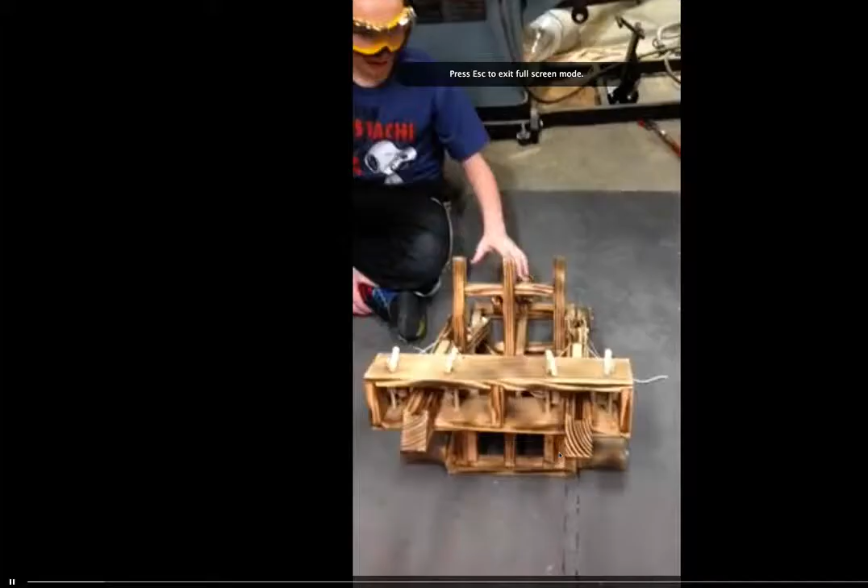Look what Ethan made. Hi, today I'll be showing you my catapult. It also has a cool feature with two ballistas. This is a catapult ballista. We will be firing at a horse. Now, you never know when a horse is going to come in your city and invade it, so you gotta fight back with one of these things.

Makes me think Trojan horse right here. So you fire, Ethan, this. Are you on here right now? Perfect. And then you pull these strings, and then it launches the ballistas, and then that horse is no longer to be seen. This is my catapult, and I hope you like it.

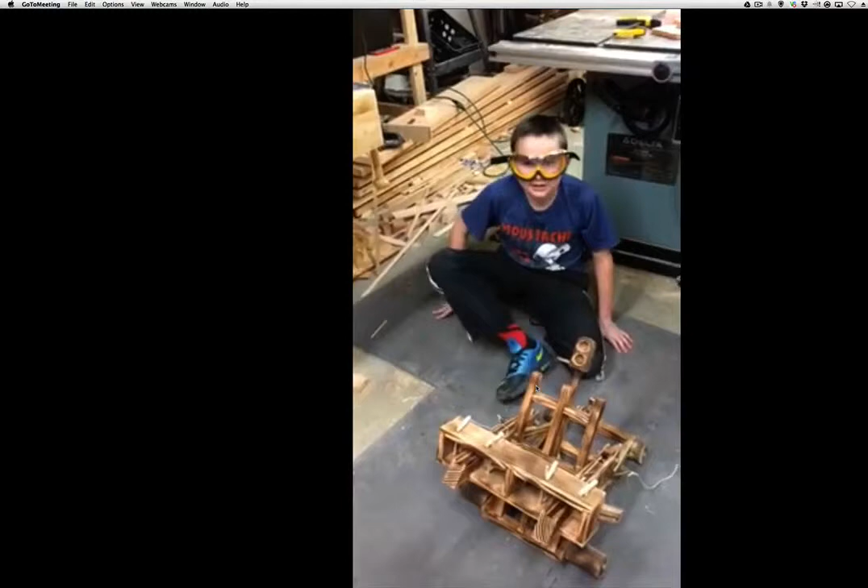All right. Well done. Ethan's not here for the lab, or he signed in. Hope he likes that.

All right, now, let me show you some more videos here. See if I can get some more videos. Oh, come on. Let's do it this way. Sarah made hers. Little hand.

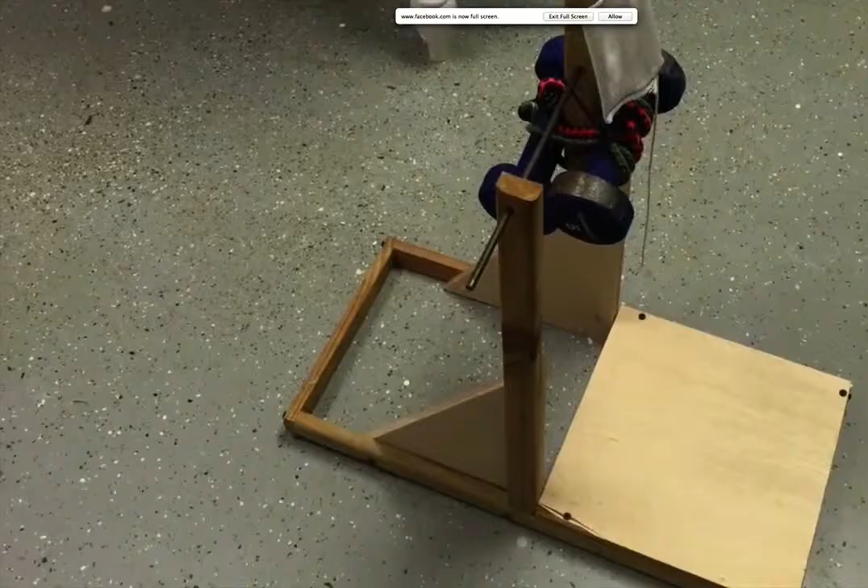Now, we've got that. And then check this. Oh, we got two more here. My name is Mateo, and I have built a miniature bow and arrow out of K'nex. I like the fact that Mateo here, as shown in the video, starts with Legos and rulers, and he keeps improving it.

Fire! My name is Mateo again, and this is concept 2. And since it's concept 2, I will be firing 2 bullets. Now, here goes. There's one. Follow the bullets now.

Hello, my name is Mateo yet again, and this is concept 3. Pretty interesting. Firing time. Very nicely. Remember, I'm doing this 3 times since it's concept 3. It takes a while to charge, but it's got a good range. Look at the dog just walking through, hey.

Pretty impressive. What's it made out of? It is made out of 2 pipes for the little groove, 2 large wooden rods, 5 little clothes hangers, and a good amount of popsicle sticks. And duct tape. Multicolored duct tape. Hey, you gotta love the duct tape.

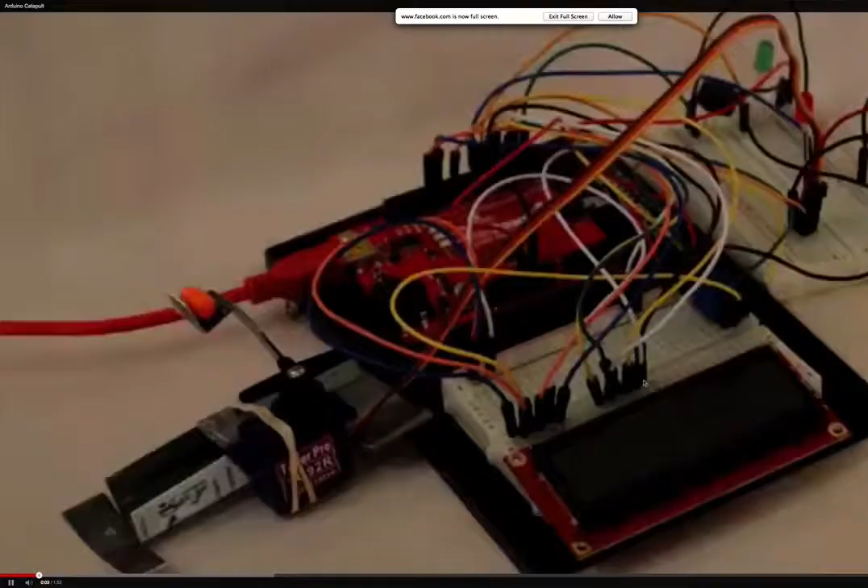All right. Last one I want to show you guys. Check this one out. He's using our Arduino. He's using our Arduino to tell it when to launch.

There's all the software. So it's got all his code showing up and the whole 9 yards. I thought those are all pretty sweet.

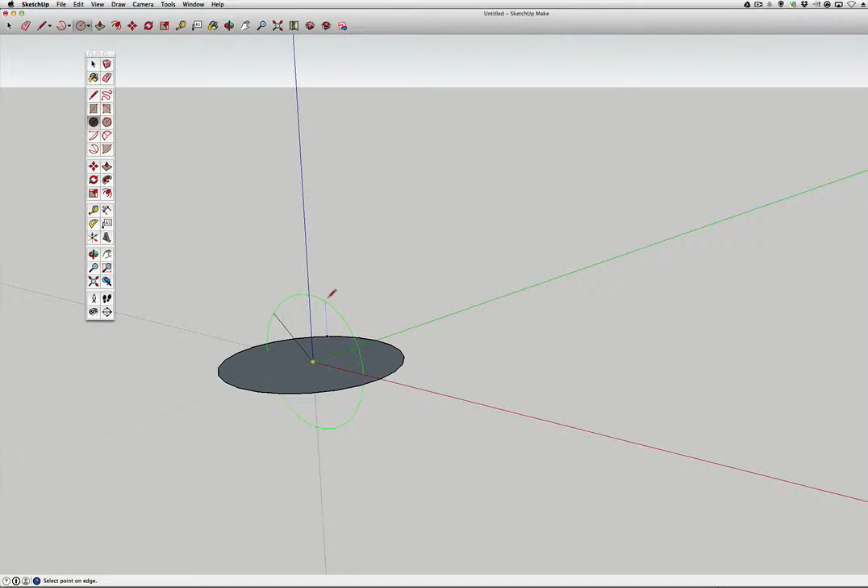And shift. Pull it in here. And I'll tell you what, just pull it out so it gets almost to the edge of the second one. So right now I'm on the edge of that. Then I'm going to use the follow me tool. All right, good. Click on that. And then I'm going to go down here. Let's try this again.

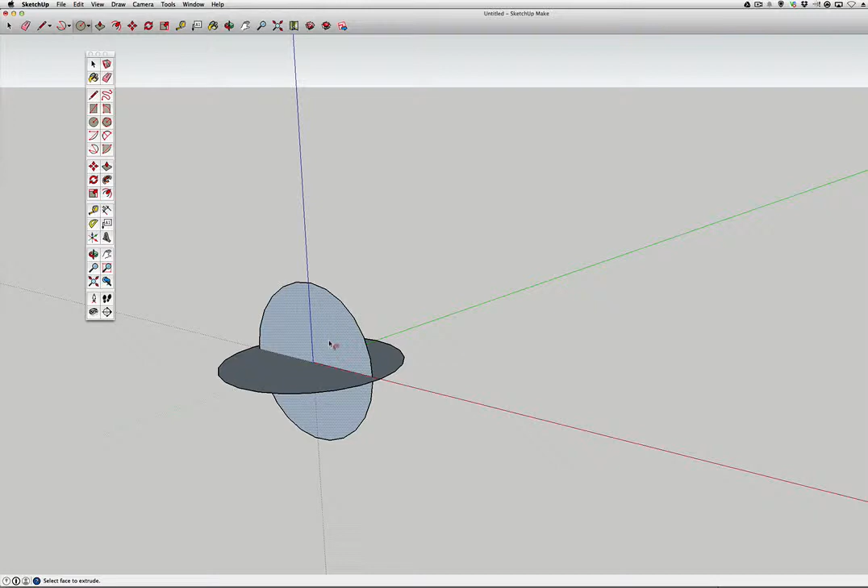And then click over and you'll get that black square. You use the command tool to hit it. Watch. Let me show you what we're going to do. Delete. And now I'll get rid of it. Get rid of this other line. So let's do that one again because that was kind of quick and you didn't see how we did it. But that gives you an idea. And then, they're cool looking. And this will give me a chance to show you this other one.

You can change your X and Y axis too on this. Click on this. Let's move the red so it's parallel to the other red. So we'll go there. Let's go on the green axis. All right, and it's already there. Okay. So you pull on the red, pull on the green, it puts you in a new axis. Again, we're going to take another circle.

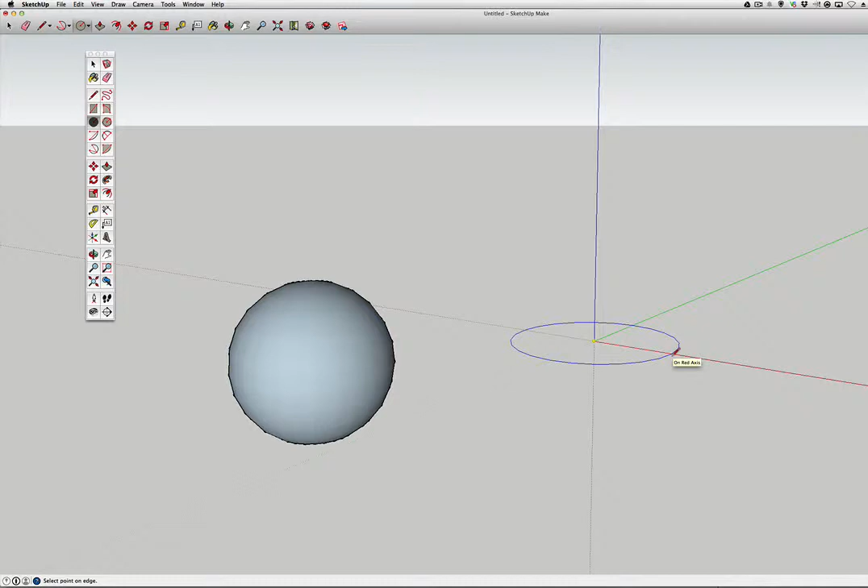Hit circle, pull this out. I'm going to say 1,000 again. 0, 0. I'm going to say 1,000 this time, maybe. This time, I'm going to hit shift. I'm going to go to either get it. That's a green one. There's a green one. As long as it's not the blue one, that's all that matters. Go back to the origin, pull it out.

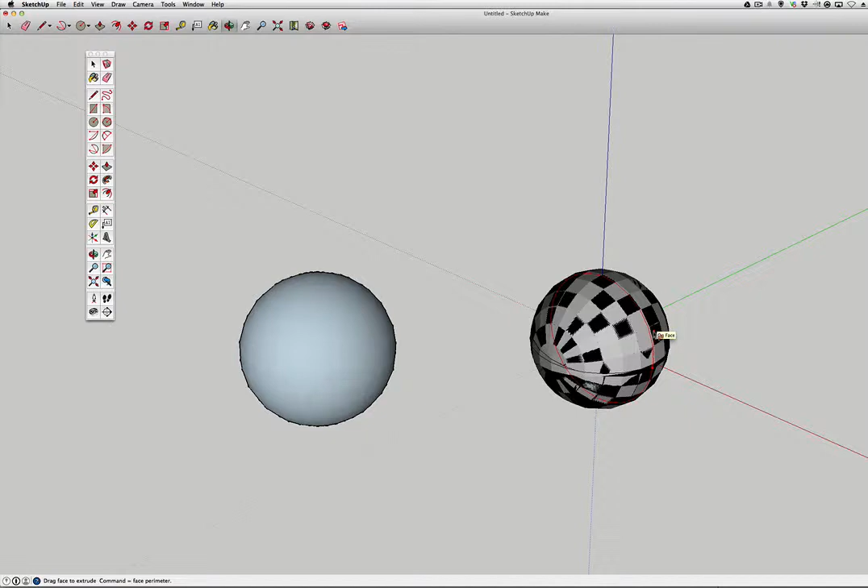I found it's better. Get as close as you can. Click. Let's make sure I didn't get too close on that. Wow, that's very close. All right, let's see what happens here. I'm going to hit follow me. There it goes. Hit the Alt key when you do it. Circle it back around. Now let's try it again.

So let's try it again. See how it gets all those checkerboards? That's what you're trying to get. And it works. Sometimes it works great, and something. There we go. I got it. It's frustrating, to be honest with you. So, even the SketchUp people say, hey, better just to download it. So the way it does spheres is not great. They need to improve that. Okay? There's a sphere. Okay?

Raise your hand when you at least attempted a couple times here. Let me know if you get one made. I think it tells you everything when SketchUp says it's better just to import one, and that's all you're doing with the warehouse.

If I go to 3D Warehouse right here, I'm showing you, get models. Watch this. Go to 3D Warehouse, search sphere. And there's all these different, a basic sphere. And you can download it or, yes, I'm going to say upload it. There it is. That's probably, honestly, the easiest way to do it. And then you could scale it, hopefully. And just use this diagonal and you can make it bigger or smaller.

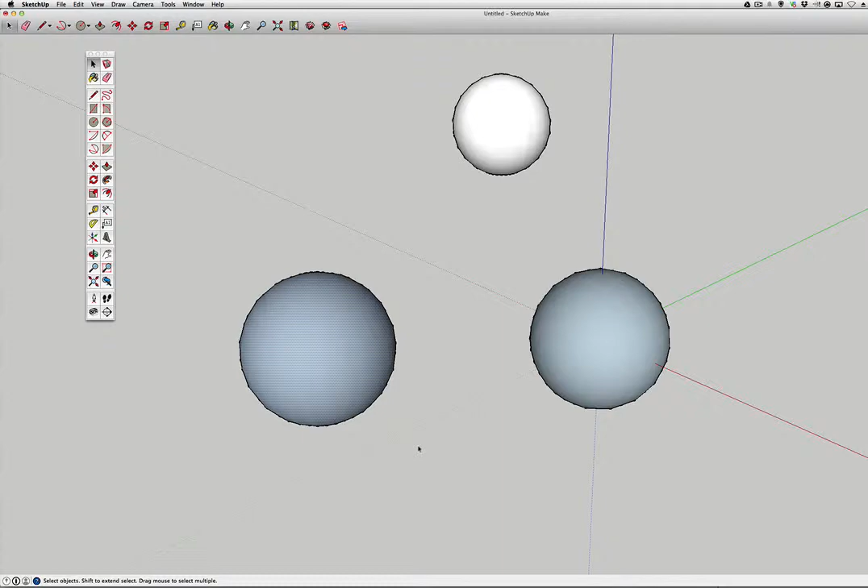All right. On these, you'd have to do the same thing. Highlight that whole thing, group it. We'll talk about this all in a minute, but make group. So that's now a group. So now when I do this, I can do something like this. When it goes, all right.

I couldn't see you do it because the webinar thing was in the way. Webinar, sorry. All right, let me show you. I'm going to show you the quick way, the way that they recommend, and I'm going to show you the other way to do this. I'm going to highlight this, make this a group. Since there's two circles to make this sphere, you got to make it a group or a component. We're going to say group.

Once I've made it a group, then I can go over here to the scale. That's this little, and then you go from the, see how I get a dotted line from this diagonal, that diagonal? Well, now I can pull it out, make it bigger, make it smaller. There I go.

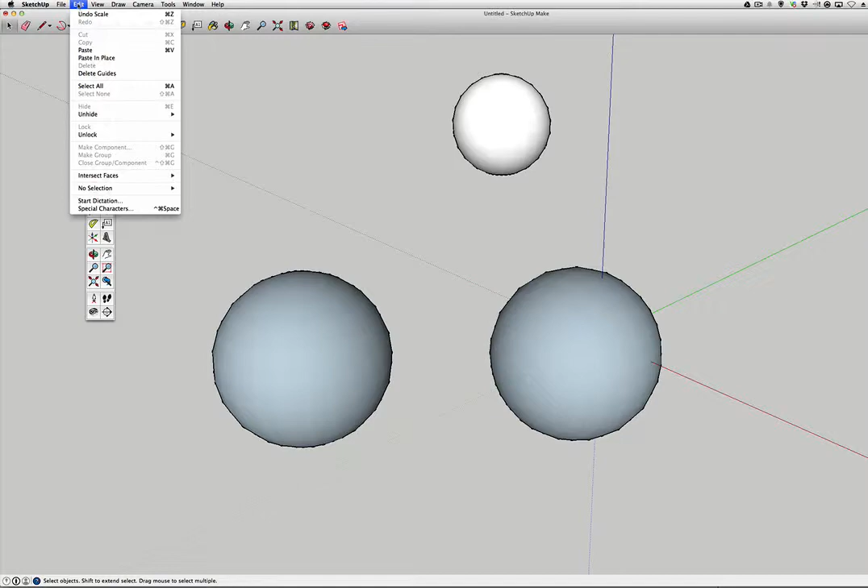All right. Now, you're saying, though, Mr. D, how do I do this? Well, let's go the first easiest way. Go to File, go to 3D Warehouse where you can find about anything, get models, type in sphere. And when I say you can just about get anything, I mean you really can get anything. All right, there's a sphere. Basic sphere. I'm going to take that one right there.

Download. It'll say, do I want to put it in my SketchUp model? I say yes. Loads it up. There it is. Move it around wherever I want it. And then I can do things like go over to here, again, this icon right there, set a diagonal across, and I can make it bigger or smaller. All right, that's one way of doing this. Let me hit the M key and move this one out of the way.

All right, say I want to draw a sphere by hand just because, hey, that's the kind of guy I am. I'm going to hit C for circle. I'm going to put it in here. I'm going to pull it out. This time I'm going to type 1,000. So there's my radius. Then I'm going to take my circle. I'm going to get it so it's not blue anymore. That's the key thing in this. It's got to change to a different color.

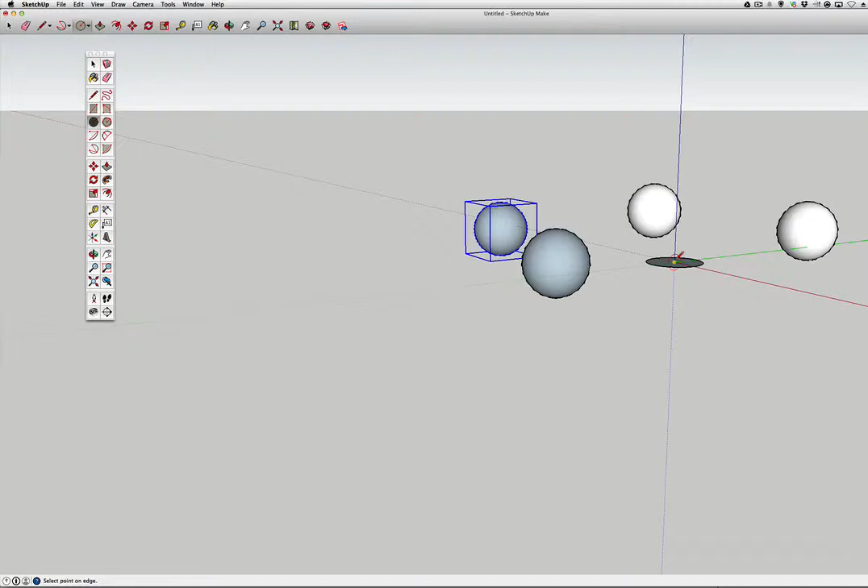And let me see if I can get this up here a little bit more. All right, so let's take it up here. Get the horizon up there. Yeah, see, now it's red. See how it's green here and then it's blue. We want it either red or green. It doesn't matter. Then hit shift so it stays that way. And then go back to the origin. Now I'm going to zoom back in here with my wheel. I'm going to pull this out.

All right, I'm going to back up a little bit. I'm going to use the Follow Me tool. I'm going to click on this, and then on this. Well, let me do this. Let me move myself around so I can follow this a little bit better. Let's try that again. Follow Me. Then I've clicked on the first face, and I'm going to click on the second one, and there it goes.

And it didn't even work. So let's try again. That's why I say importing it's better. I can't get this to work. See how it is right now? It changes that shape. And then it just went off. So let's try it again. Little one, big one. There it goes. I can follow the red line around, is another way to do this. And I just had it there. Let me try it again.

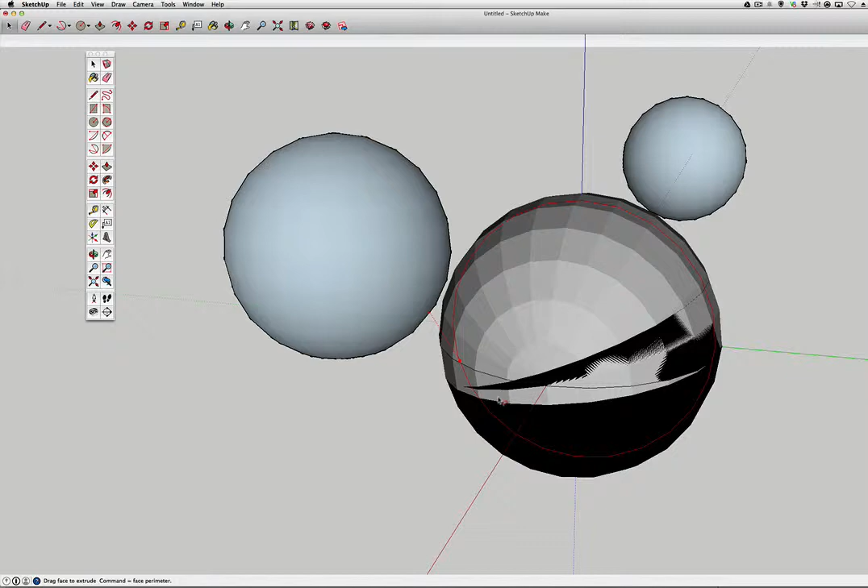It should go gray. So when it doesn't go gray, when you press enter or click on it, see, it's not doing it. It's not catching it for whatever reason. Try this again one more time. Click on it. Wrong key. One more time here. Let's try it again. Go up here. Let's try it one more time. First circle, command,

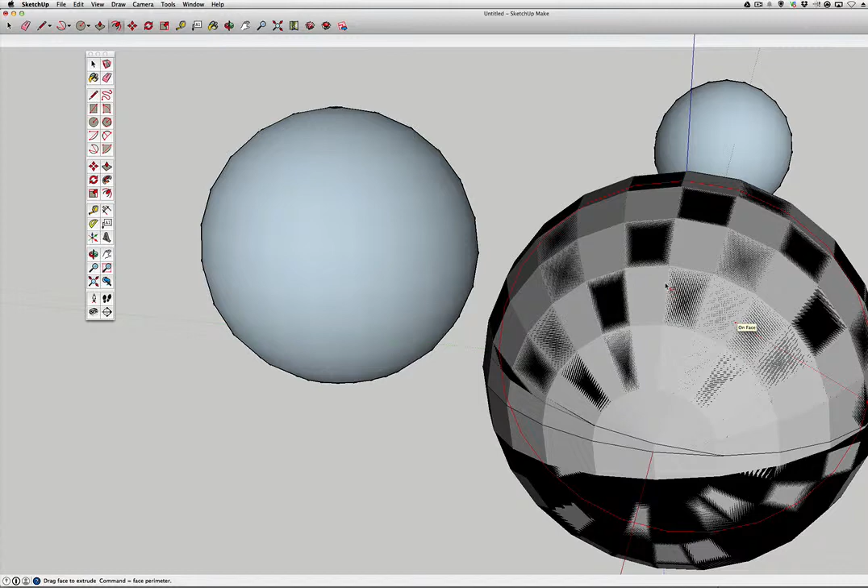and I'm not even sure why it's not catching no matter what I do for some reason now. Yeah, there's a line on the outside. It's not right anymore. I think if you don't get it the first time, it starts acting funky. So see, like now I got it. Now you tell me why it's doing that. See what I mean? I do that, and then go up.

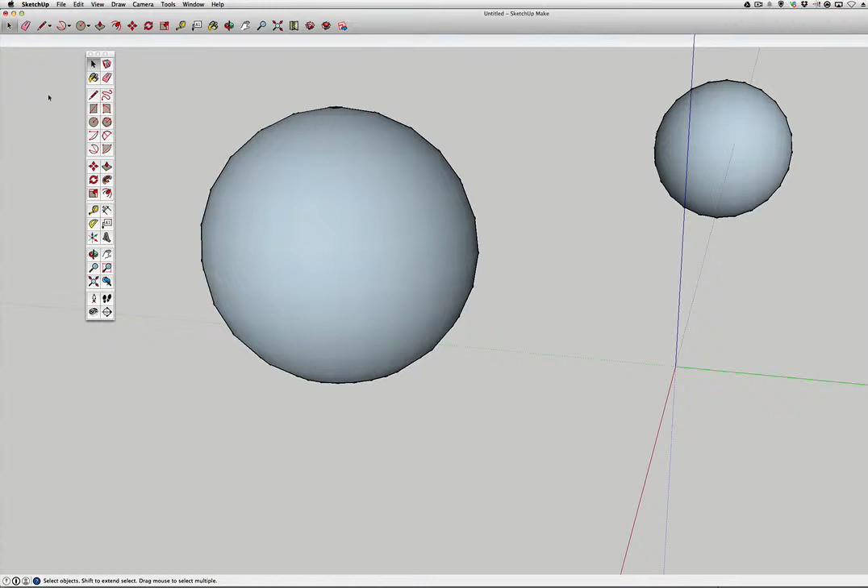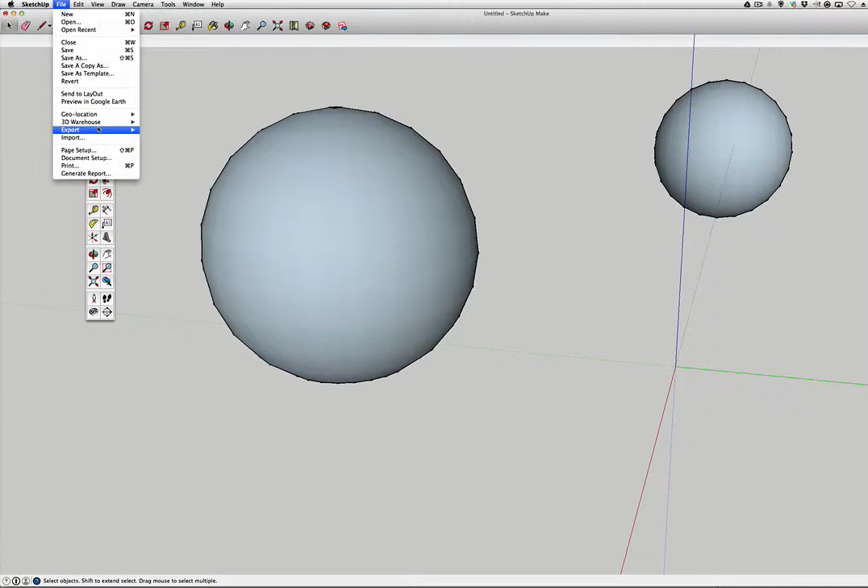So let me just show you the way I want you to do this. We're not going to bother with the steps anymore, guys. It does not work well this way. I've been playing with this. I had it working, made a bunch, and then it suddenly starts acting strange. So let's just do it the easiest way, the way they recommend. Go to File. Go to 3D Warehouse. Get Models. Type in Sphere. They have about anything in here.

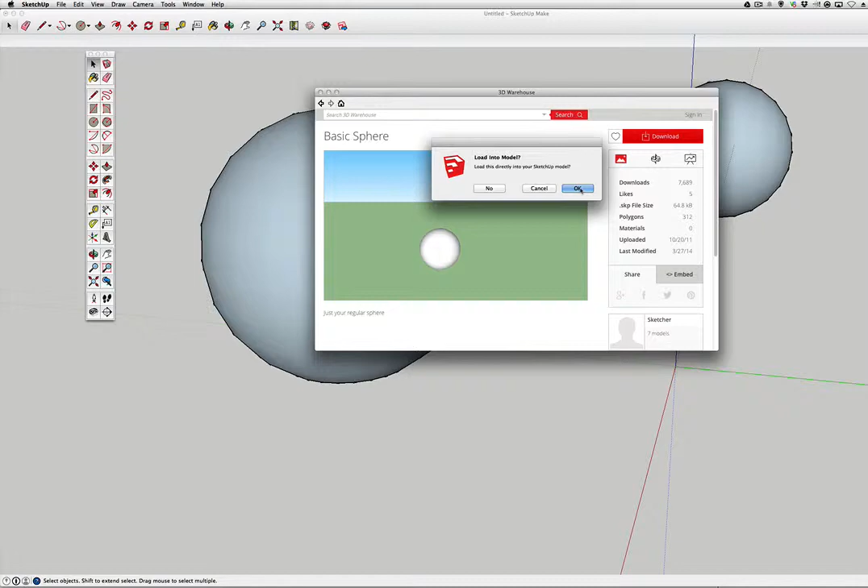Don't spend all day looking in here. You can see all the stuff they've got in here. Please look at that some other time. Select just that basic sphere. Then you say, that's what I want. Click on download. Directly into my thing. Boom, there it is. See, this square means it's grouped. Because it's grouped, I can go over to the scale button. See how it's green and diagonal across? You want to make sure there's that inference line going across.

Now, just click once, and you can make it smaller, bigger, whatever. That's what I would recommend you do.

Yay, you made it. Good job, Cooper.

All right, has everybody been able to at least make it from the warehouse? Raise your hand if you can. This we should all be able to do. The warehouse one should be pretty easy to do.

I only got about 8 of 13, so I can't figure out if you can't hear me or you're having problems. So, all right, 9 of 13. Have you gotten it? Hope, have you been able to figure it out there? Cooper's gotten it. Hope, yeah, all right, good. Jaden, all right, great. So you just import it, play with it. Let's go to another one.

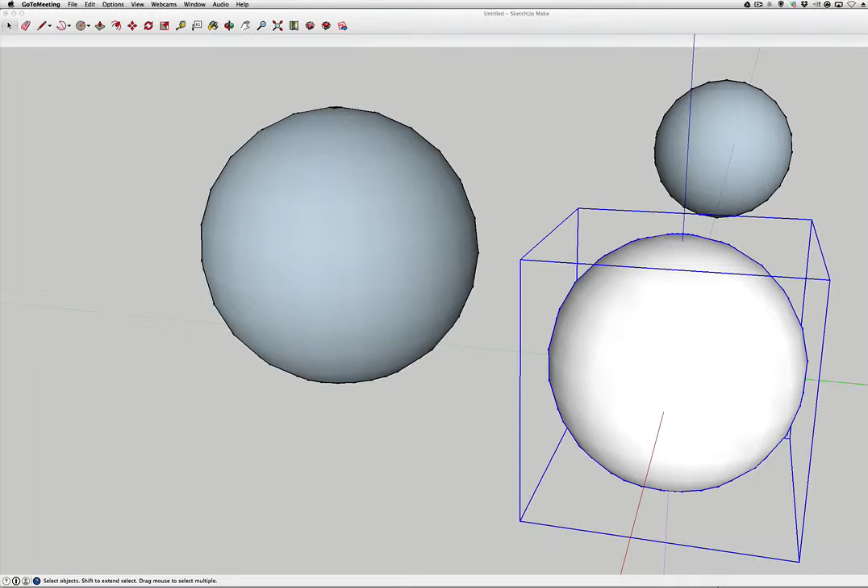Mine's not loading. Hope, I'm not sure what's not loading, Hope. Hey, Hope, what's wrong? What do you say, mine's not loading? Hey, Hope. Just go over right to here. Hope, go to File. Now, you got to be on the internet with it. So your internet might be slowing you down too much. Okay? Maybe having this webinar is slowing you down, okay?

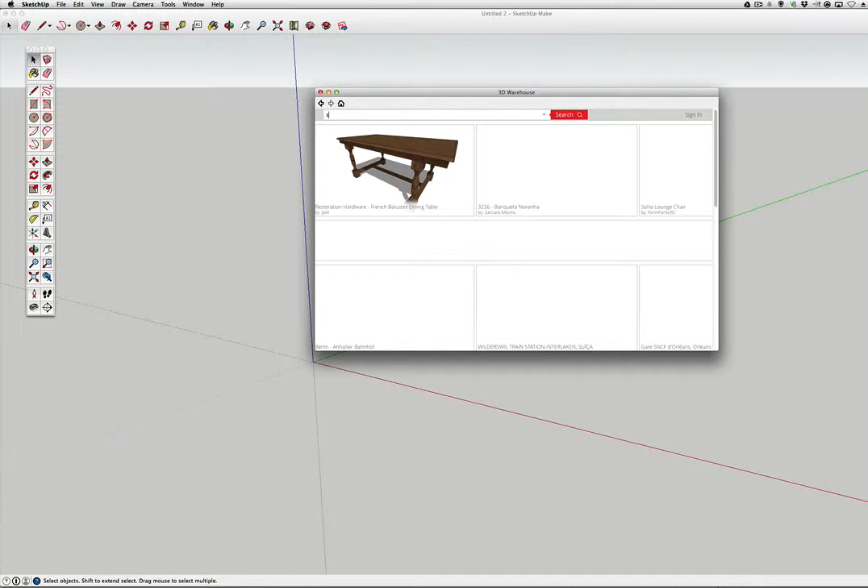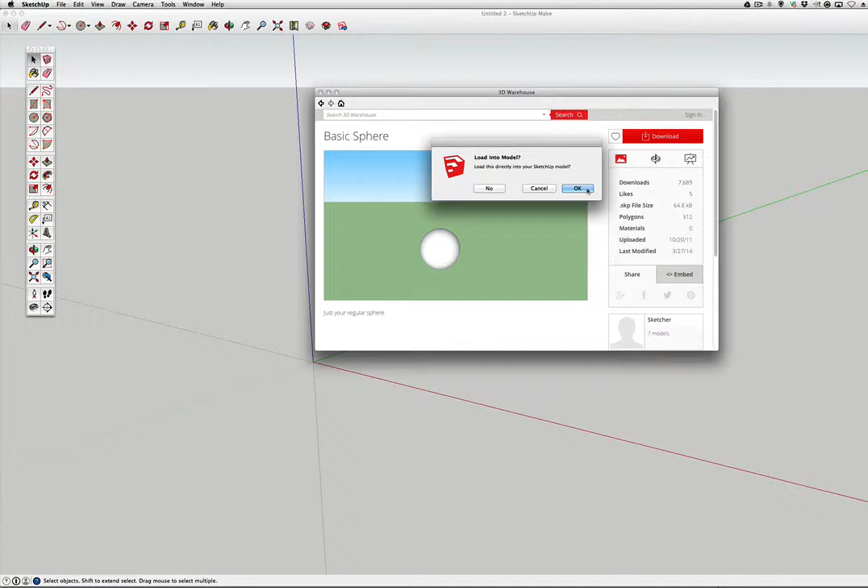So I'll just show you one more time for Hope, and then we're going to go on. So here I am in SketchUp. I'm going to go File, 3D Warehouse, Get Model. I'm going to look for it. Sphere. Whoa, yeah. That's Sphere E, which is nothing. It's circling and looking. There it is. I click on that, and then I hit download. And you say right in your SketchUp model, you say OK. And there it is. Right there.

Okay? Some people are making half spheres. Some are doing all kinds of crazy things. How do you drag something? You hit M for move. Make sure you've selected it, clicked on it 3 times. In this case, it's a whole group, so I can do that. And just pull it right down there. Stay along the green line, whatever axis you're on. Like here, it's going to be the red line. Stay on those lines or you're going to have problems. Okay?

All right. You all good there? Okay, can we go on to the next part here? Let me get out of this. If I select this whole thing, drag my mouse around, select it, hit delete, it'll go away too. Okay, let's take a rectangle. We're going to draw it out here. Then we're going to hit P for push. Pull it up. All right.

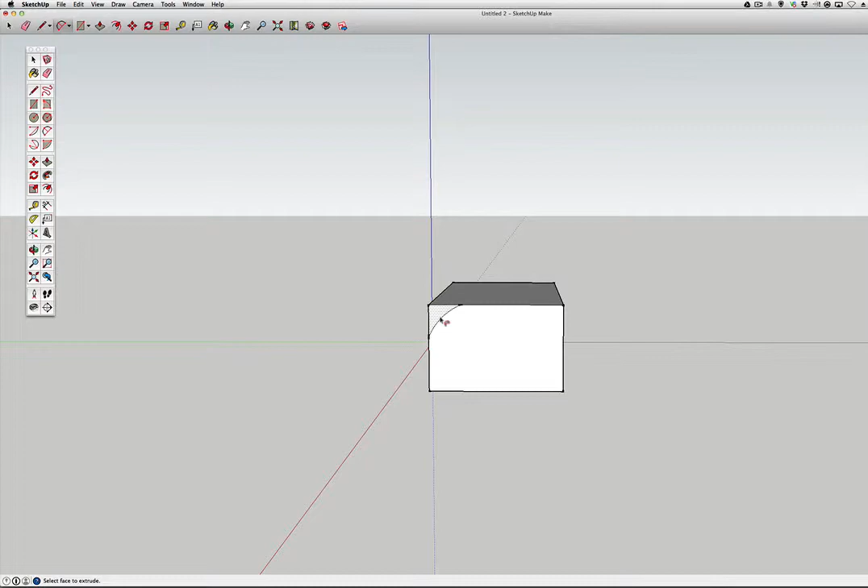Let's say we wanted to soften those edges. This gets to our next thing I want to show you. And this is when we do the arc. We're going to click one edge here, red on the edge, and red on that edge. Make sure it's on the edge. And then we can move this either way. We're going to move it forward there. Then we're going to do something called Follow Me again. We're going to hit the command key, click once there, and on the top, and boom, it does it. It may be alt on a PC. Let me show you how I did that, because that's actually a pretty cool thing.

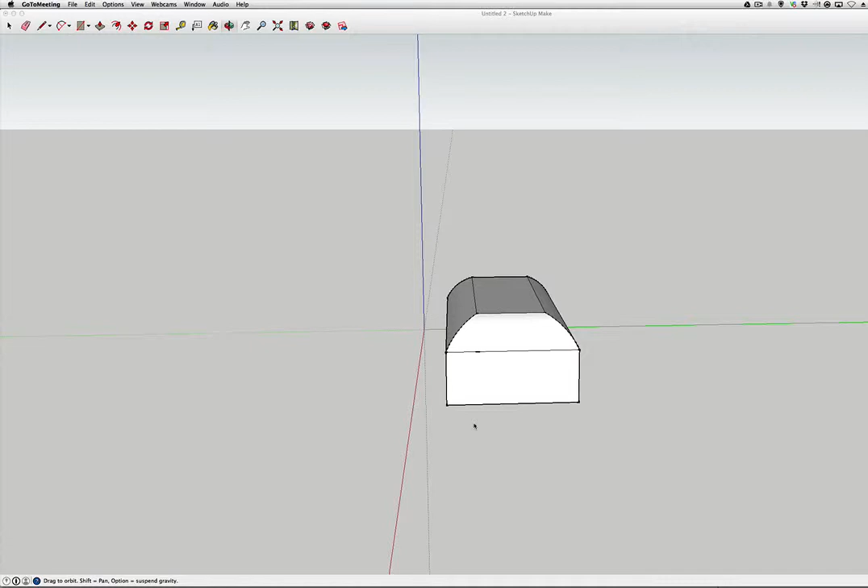I'll get Hope muted there. Everybody take a look again. I'm going to take a rectangle. Hit R for rectangle. Draw it out. I'll wait till I get a square here. I'll pull it up. All right. Now, say I want to do something neat on here. Let's do a 2-point arc. So I'm going to be red on the edge. It's important I'm on the edge. On the other edge, and I'm going to pull this way just a little bit. Right there it is.

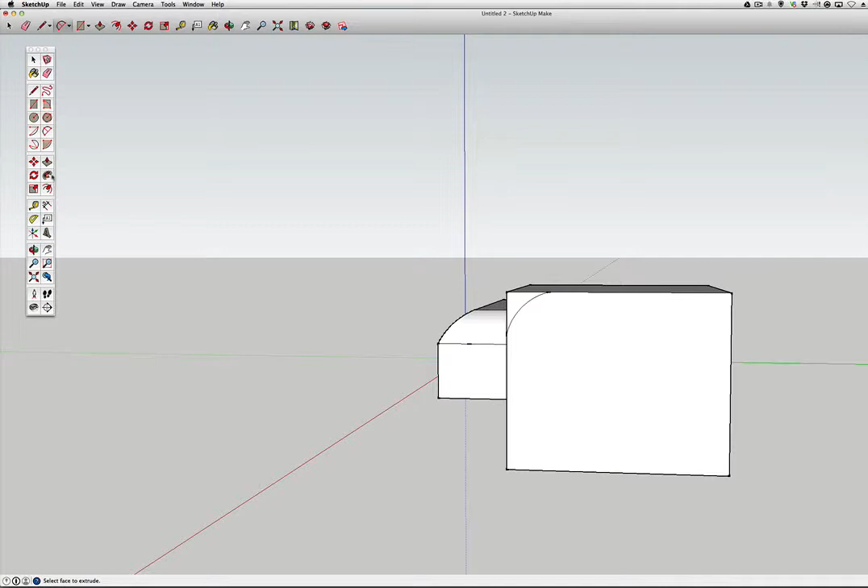Then, on the Mac, it's the command key, and I'm going to click on that Follow Me. On Windows, I believe it's the alt key. Click on that, and then click, oh shoot, let me go back up here. I need to do this like this. All right, here we go, hold the command key. Oops. Try this again. There you go. Click once, and you see how that shape's going all the way around it. Go ahead and try that.

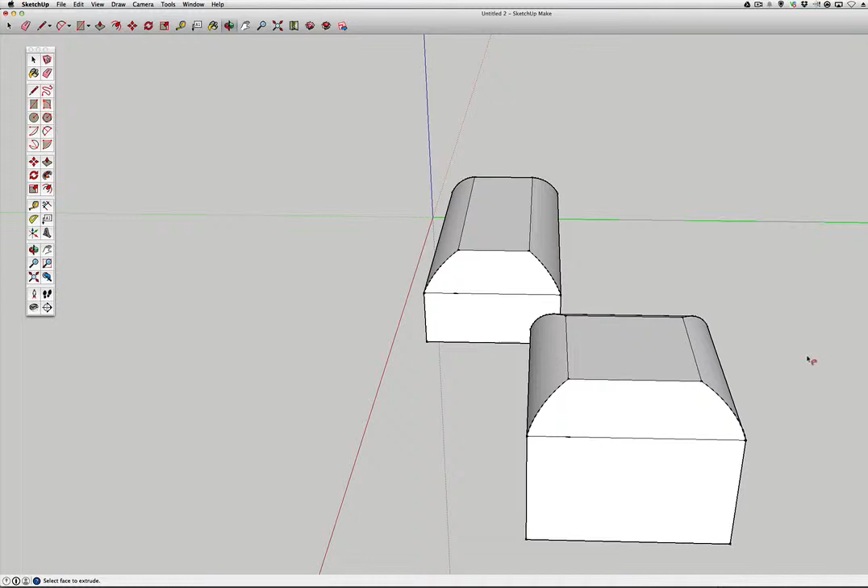Let's just take our time. I know it's a lot here, so we're not in any rush. I'd rather we get this down because this is a cool feature. Again, I'm going to hit R for rectangle. I'm going to hit P for pulling it up, right? Remember we learned P for pull up. Okay. Then I'm going to pick this arc tangent. I'm going to get it on the edge where it says red. We're going to give it a little bit different look. Then I'm going to hit the Follow Me.

And then click on top. And there it is. If you look at me, it gives a nice, and you can do all kinds of funky things with this. We've just started. Raise your hand once you've done that, okay? Well, while you're doing that, I'm going to work on, create a poll here. All right, good. Well done, folks.

This software is one of the tools we can use for 3D printing. I think it's going to ultimately lend itself well to when you guys have a laser cutter down the road someday. Get your hands on a laser cutter.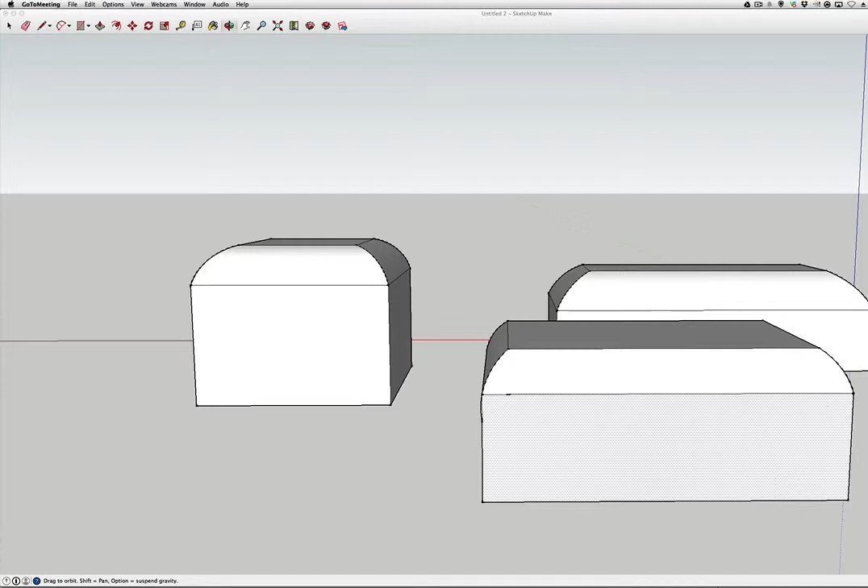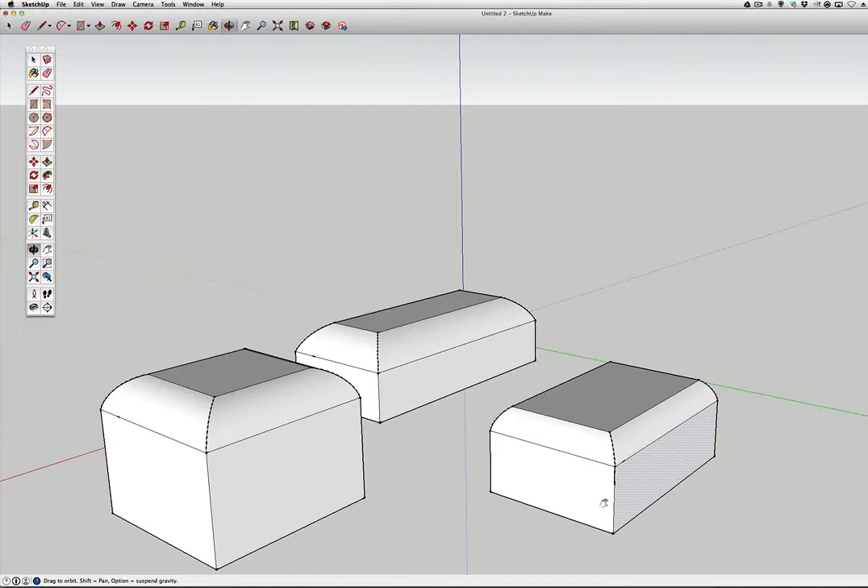Let me know. I can't do it. No worries. Let's try again. Okay, let's go over here. Again, if you're a Windows user, it might be a different key. And if you do a search on this, this is called the follow me. All right. Now, I'm going to hit shift to pan this over so we have some room.

I'm going to draw a rectangle. Or square, whatever. See that little inference line there? I'm making a square when I see that. I'm going to hit P for push. I'm going to pull it up. Then I'm going to hit O for orbit to swing myself around. It's important to get yourself where you can get to things. Shift my hand.

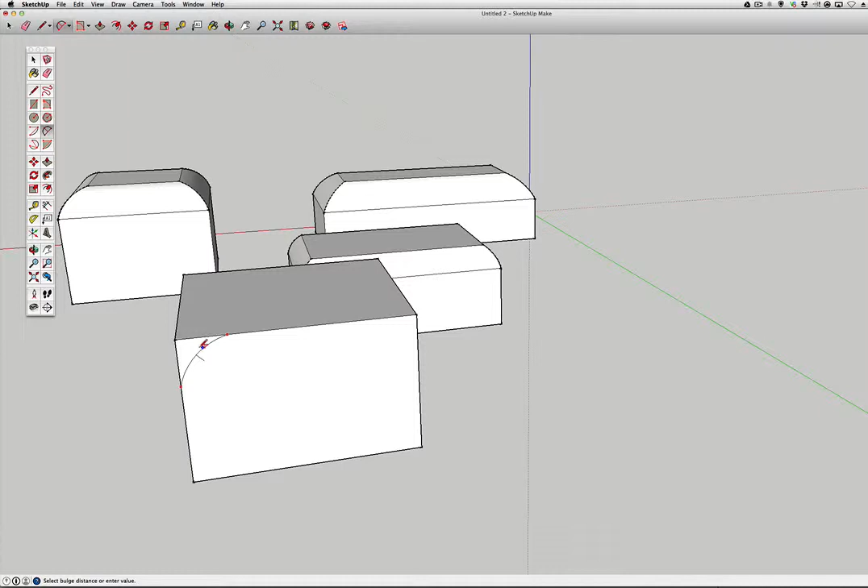All right, then I'm going to click here. Whoa, I went the wrong thing. We'll get to that down the road. We don't need to use that right off the bat. Let's use this. I'm going to go to the edge. I'm going to go to the other edge. In this case, we'll make it a little bit extreme here.

All right, now I'm going to hit follow me. This is what I'm using, a Mac. I hold the command key down. I click there, and then I click on the top. See how that looks? And I get that. Do you see that, folks?

Everybody put their hand down. Windows users, how many of you guys did this? And what key did you press? Did you press the Alt key on your Windows machine? Or was it the Control key? I figure it's one or the other. I think it's the Alt key on Windows. We can look it up in a minute here. Alt. All right, it was right. It is the Alt key.

Did you get it? Sounds like you did. All right, good. You got it. Excellent. All right. You don't have to use Alt. You can also follow it. You can do it where you trace it all the way around. I just find that's a shortcut. Okay? Someone's already pointing that out to me. They're very correct.

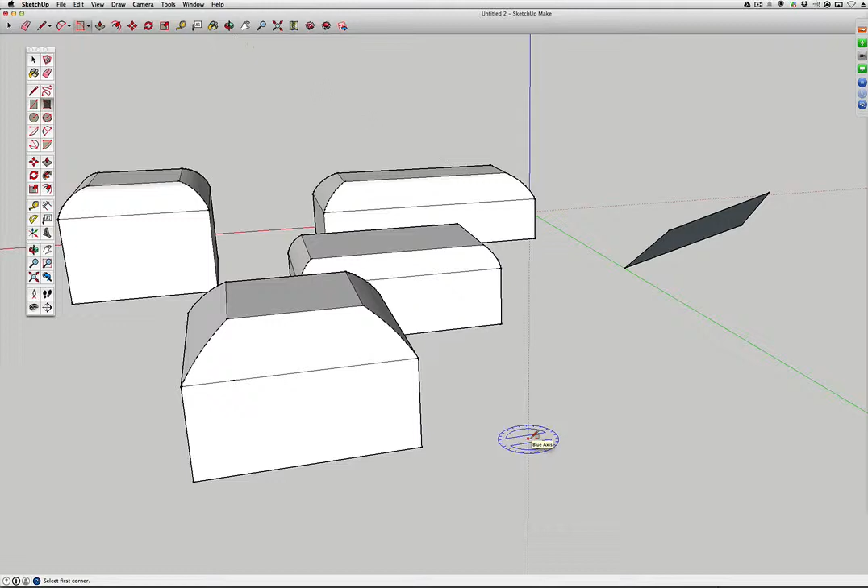I can take it at an angle here, click there, and then use this to pull up an angle off that. So I get this going for you. So it's kind of funky, even the people that make SketchUp say you have to play with this a little bit to get the most of it. So you can get all kinds of funky shapes that way. I don't think I'm using that one very much. I think you'd have to get pretty good at using that.

All right? Now, let's go ahead and do another one. Let's talk about punching holes through these things. And I'm going to show you the trick on this. Now, these need to be parallel for this to work well. So if you do it on these things here, you have to do it on the rectangular part. Don't do it up on the curve, because it can't do it for what I'm going to show you. So I'm going to start off with a very simple R for rectangle again.

I'm going to draw it in here. In fact, we got too much stuff here. Let's go new. Let's start right here. R for rectangle. We got a square. P for push. All right. Say our guy wants to be able to look through this building. Well, let's make him a little window. So we're going to put another R right up there.

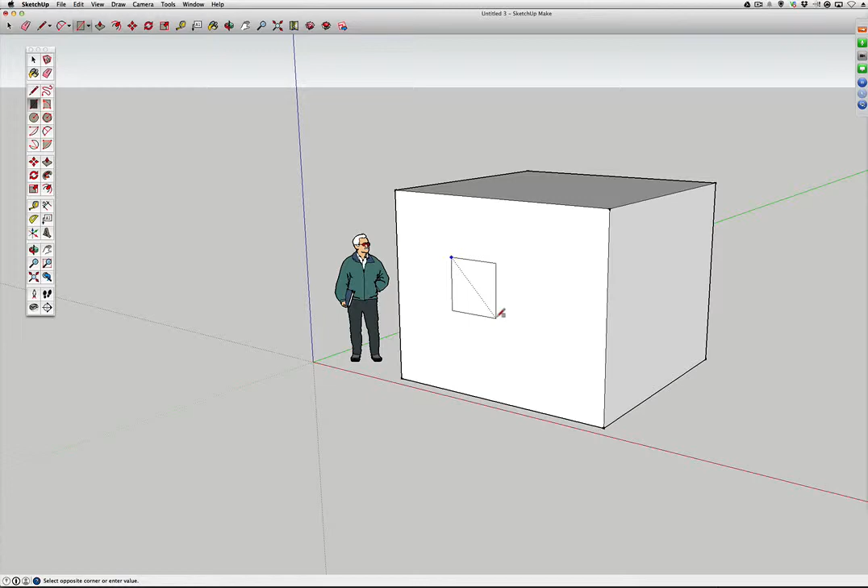Another square window. Now, before we push or pull, I'm going to circle around so I can see it. I'm going to hit P for push. Then I'm going to push it in there. And then suddenly, if I do it slowly, it'll say face. I'm too high up. All right, let's try this again.

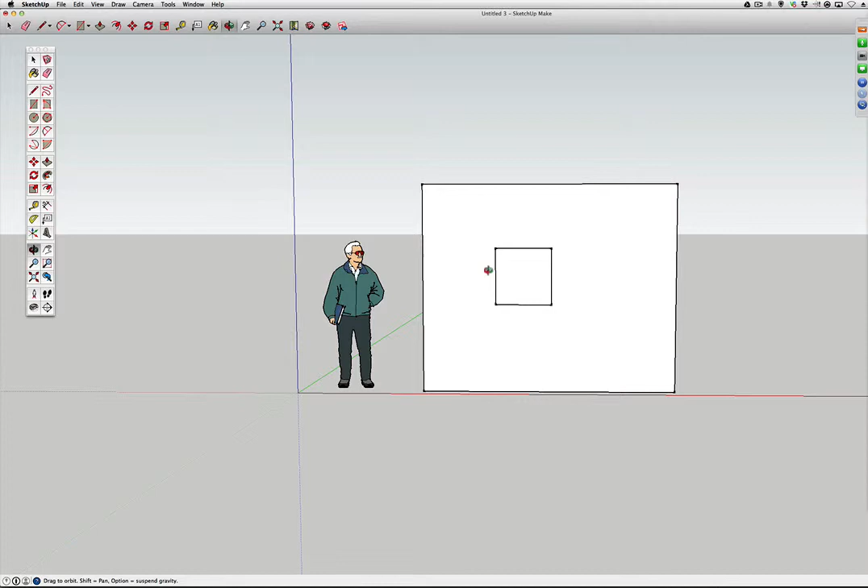See how it says on face? It kind of changes blue with the blue skyline. Now if I click on it now, guess what? I punched a hole through this building. Everybody do this. Again, you got to wait. Do it slowly so you can see face.

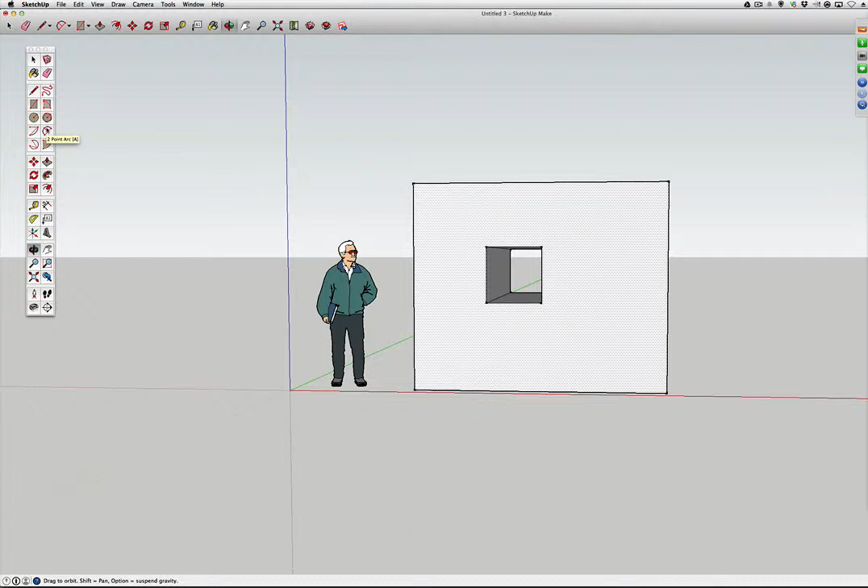And you can do funky things with this. Like on this, I'm going to do a 2-point arc. I can even do a 3-point arc here. Let's see how that would work. All right, here, here. I don't think that's going to work real well. Let me undo that. That did not work well. Not as intended.

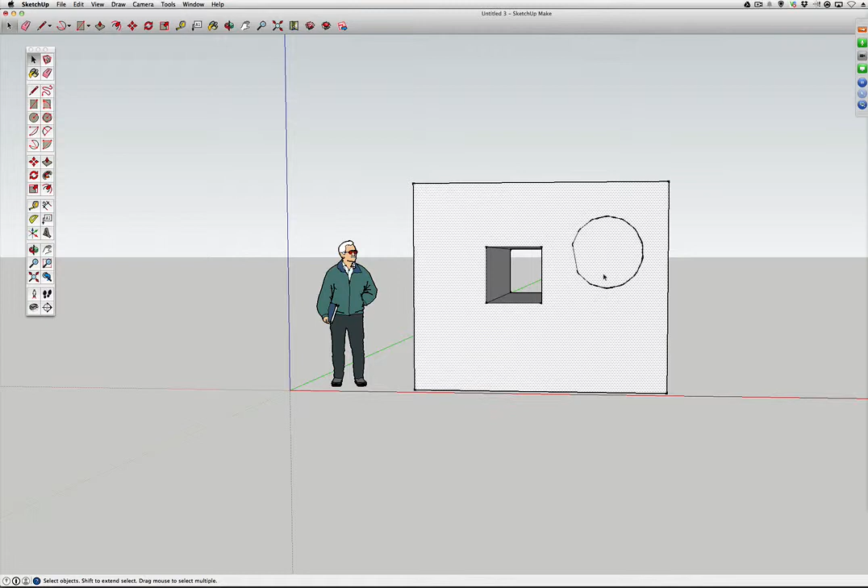So I'm going to Command C. Let's just do a 2-point arc. Watch. See, the 3-point arc, I don't really... So I'm going to put a little window here. This is going to be a little half. Right there. I'll change this to an L for a line. On this endpoint to this where it says endpoint. On face, on face, on face. Come on. There we go. Green for a little endpoint.

Now I want to hit the push and pull on this. I'm going to push on it. And I hit the wrong thing to push on. Let's try that. Now hit push. Why is it doing that? Now let me push it in. So I must have messed something up on that line. Yeah, it wasn't against there. There we go. Now I'm pushing it back in. There it is. See on face? Now click. There I go.

All right. How many people have gotten that to work? Raise your hands. All right, come on. Let's give everybody a few more moments here. All right, now let me just real quick select a poll here in a second, just because I want to get a sense of how we're doing. Go ahead and pause that.

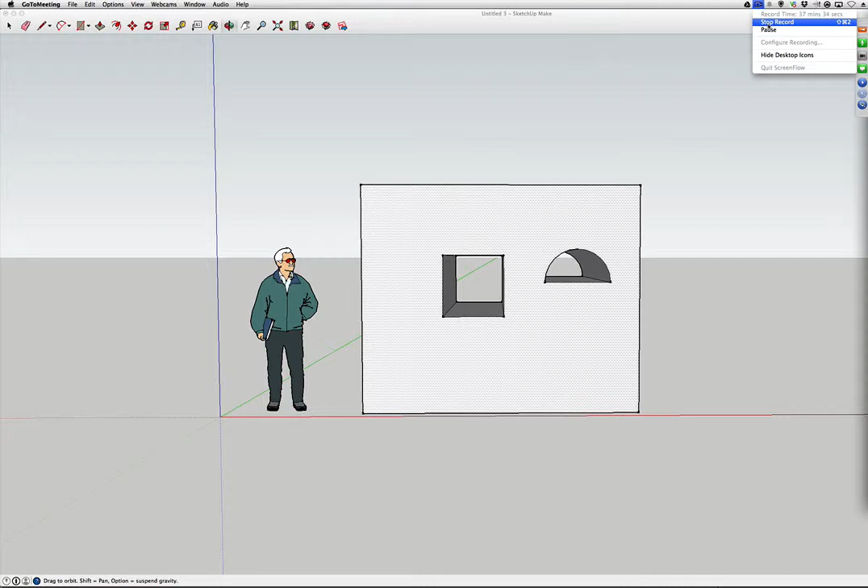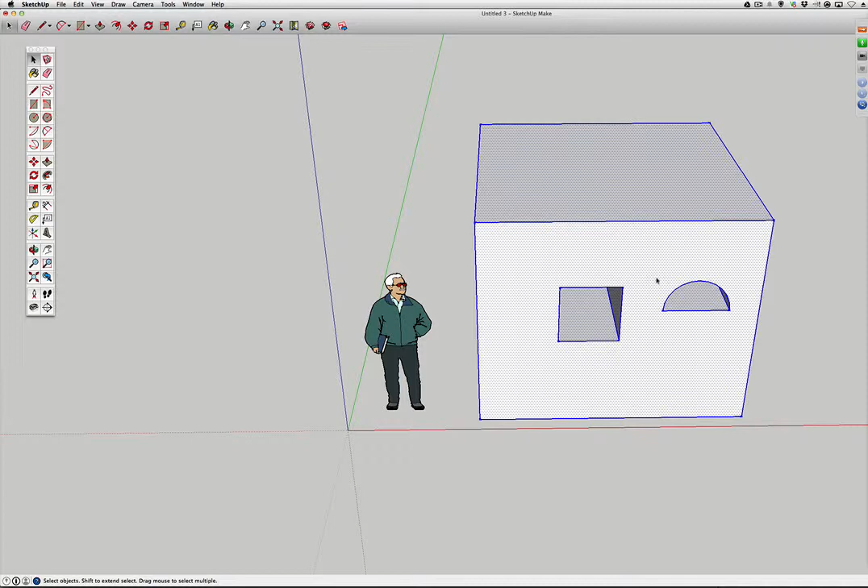Let's do something else now, if that's okay. And I've got the video. You can come back later. It'll be posted by this evening. All right. I'm selecting the whole thing. I could have done this. Remember, triple click on it, hit delete. Now, I'm going to show you how we might make a table.

Okay. We got a question here. Hang on. What do you click to make a hole after it's pushed? You don't have to click a hole. Watch what happens. I'll do that for you real quick then. All right, let's go ahead and do this. I don't want to do that. You can tell.

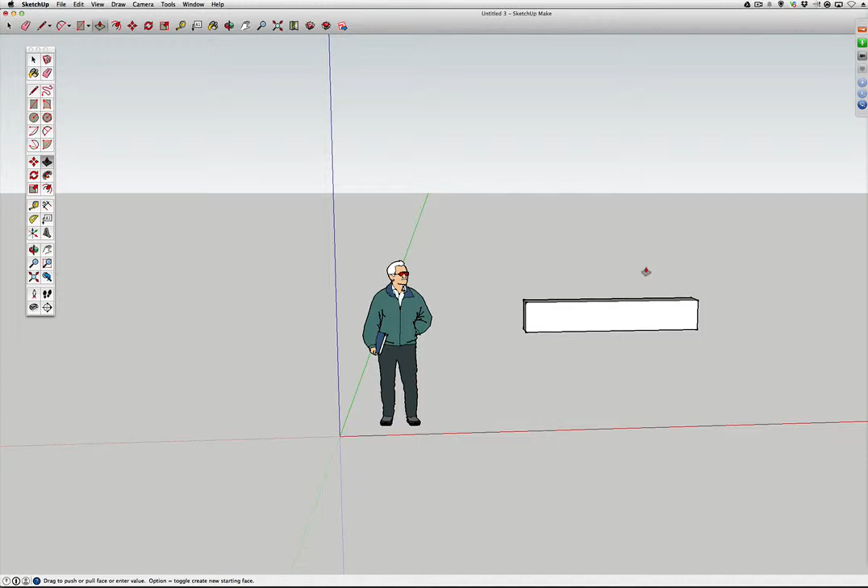Okay, when I go to put a hole through this, I'll make a big hole here. Watch what I'm doing now. All I do is I hit push. I push it till it says face. Now it's on face. Then I stop clicking. See that? So that gives me the hole.

Oh darn, do I still have to hide the results? There we go, sorry. All right. Okay. Let's try that again. Let me do that again.

Let's go edit and do push pull. All right, so there it is. I've got a square here. I'm going to do a push pull. Watch, when I push until I see it says on face. Now, see it says on face? Then quit pushing and it'll be good. Before you start pushing, make sure you're centered right through it so you can look through the holes. That's the best tip I can give you.

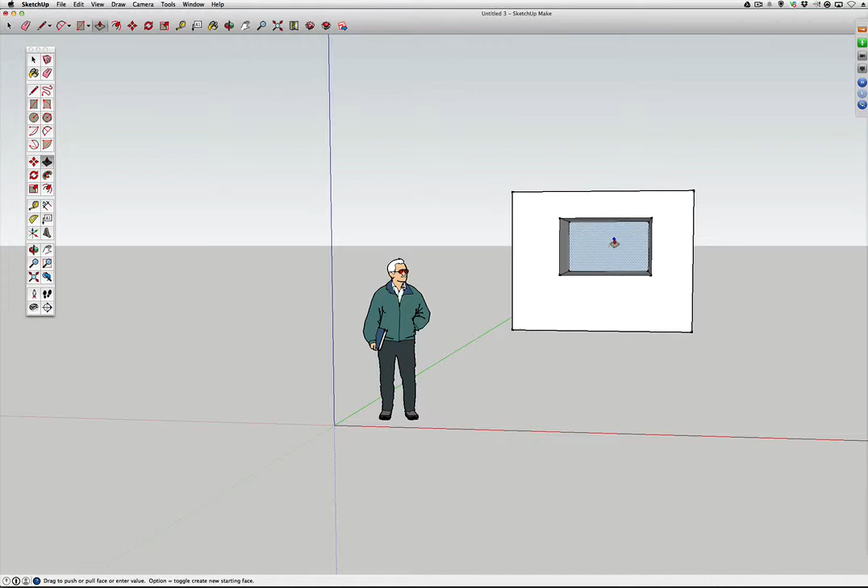All right, so we'll try this one more time. So here we go again. Push. Push till it says face, and it just did. And click. And there you are. All right. Okay. Raise your hand if you're able to do that. We can go on to the next part here pretty soon.

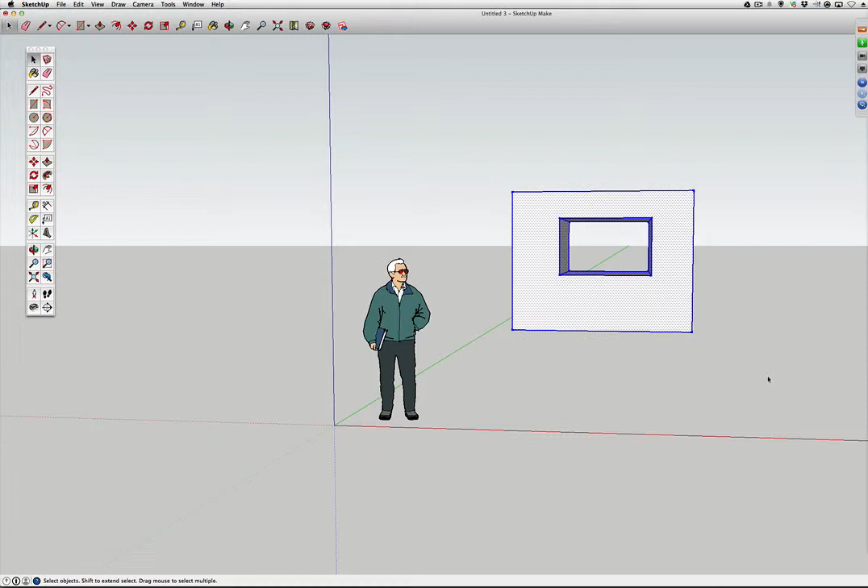All right. Now, pointer. Okay, we're going to make a rectangle. It's going to be 4 feet by 4 feet, 2 feet wide. So, we'll hit R for rectangle. Start down here.

Now, we're going to go down at the bottom right corner of this, which you might have just lost it. We're going to write 400. We're millimeters, so we need to go more than 400. Let's go 2,000, comma 1,000.

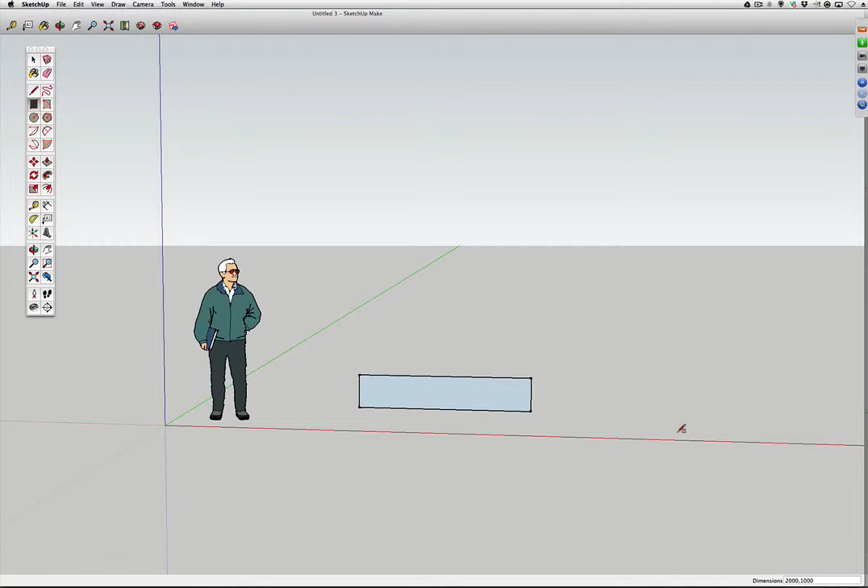All right, so it's that way. Then let's use push pull and tell it to push. And it says distance of 481. Right down there at the bottom, I'm going to type in 3,000. Okay? So what we have here is this big rectangle here.

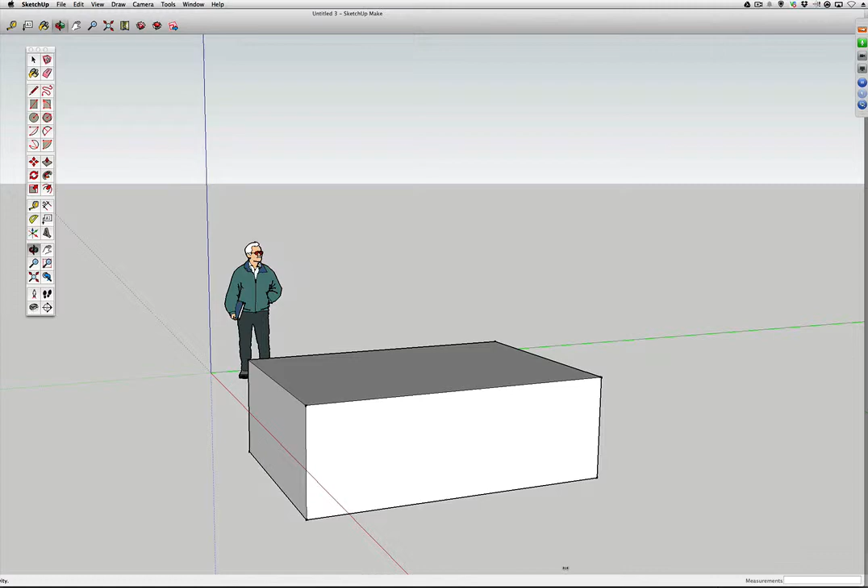All right, we're going to move the rectangle around. Remember, it was 4,000 by 2,000, and we just made it 3,000 as the push. 4 by 2, and then the push is 3,000. Raise your hand when you have it, okay? So let me give you the dimensions. Type in 4,000, 2,000 for the rectangle, 3,000 for the push. I just sent it to everybody. Once you've got it, let me know.

I'm going to get my tools out here. There they are, right there. All right. Raise your hand once you have it.

Pardon me? I can't find the point at where you can do it on the face. What you have to do is change the pointer, hit spacebar, and then hit P for push or pull. I'm not sure what you mean on the face.

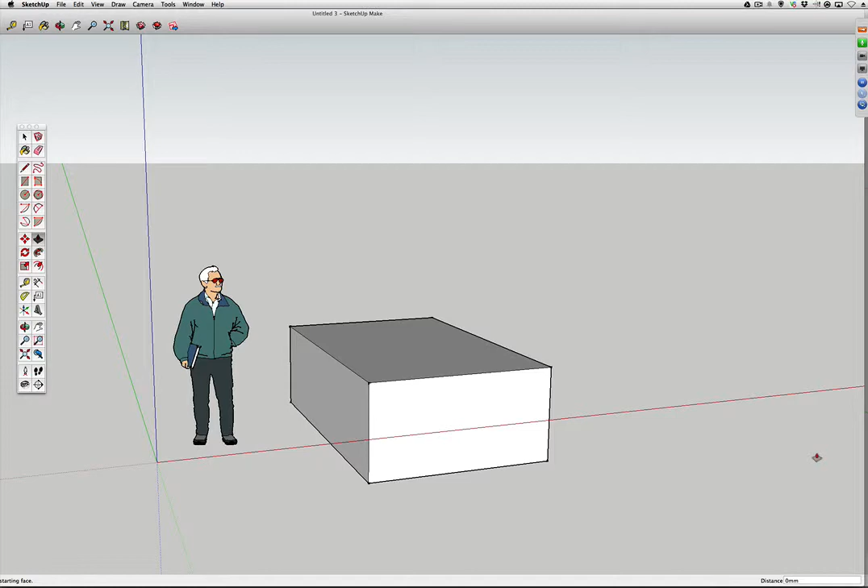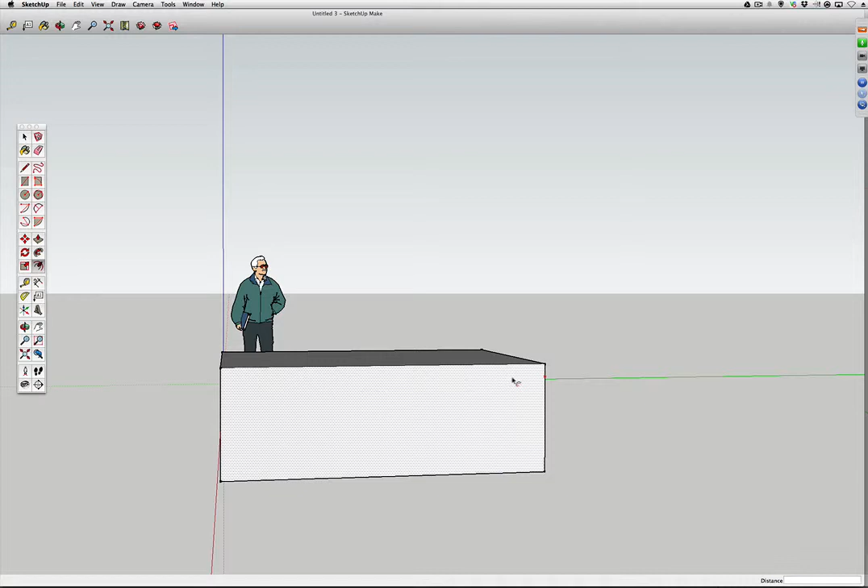All right, now let's get to making this table so we can get to making our Roman temple here in a minute, or at least Wednesday. All right, there's the next one we're going to use. This is called offset. It's F for offset. So go up and down. You find the red edge here. That's all that matters. You get the edge. You click it. You pull it down.

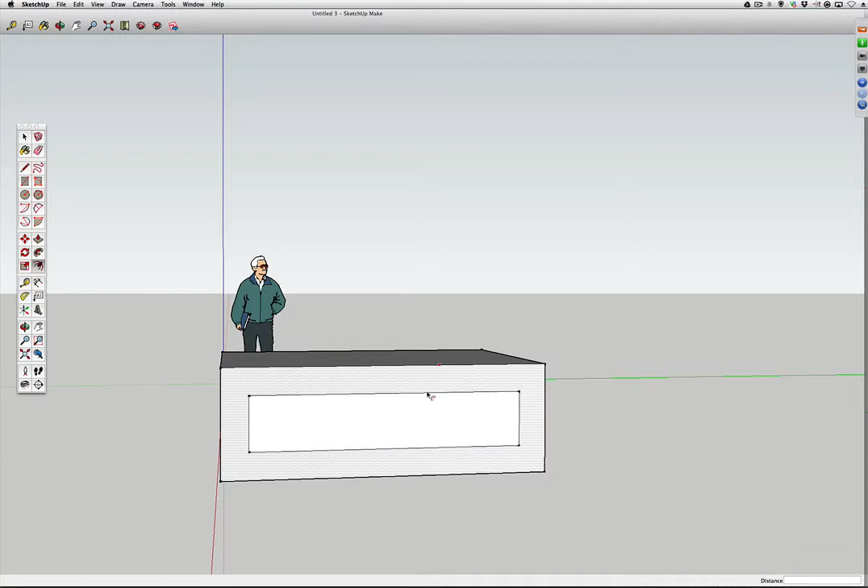So let's say the offset on this I'm going to make is going to be, that's 367. I don't want to go 500. That's too much. Let's go with 250. So I'll type 250 at the bottom. It sets the offset to that. Now I'm going to hit my push and pull.

Push it until it changes the face. Come on, change the face. We know you want to change. Don't push it too much. All right, here we go. I'm going to have to go back down here. I'm going to turn it and I'll hit push again. All right, now it says on face. Click on it. I can see his leg. Yay! All right.

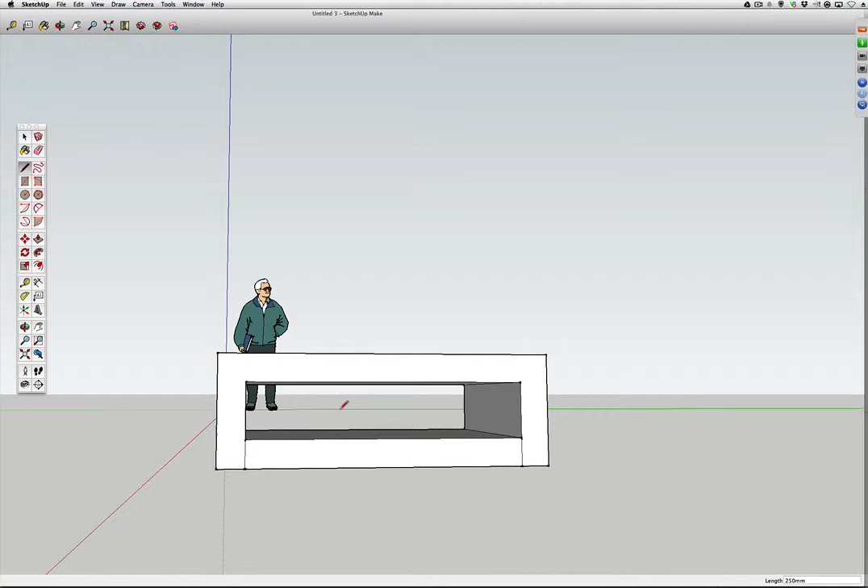Now what I can do is I can use the line key if I want. Click here, right on the edge of this. It's green. There's an end point. Take it down there on edge. And do that one right here. Down here on edge. Now watch what happens. Hit P for push or pull. Now we have this. I'll push this back. I'm on edge. I can also do this with this one.

Hit the space bar. See, it's right there. Let's see if I can get it to go. See, since it's really not a hole, what we'll do is double click on that and then hit delete. Now I just messed that. I just made that little cut and groove in there. Here I can do it a different way. Watch. Just go like this with these lines. Hit the space bar. Select this area here and hit delete.

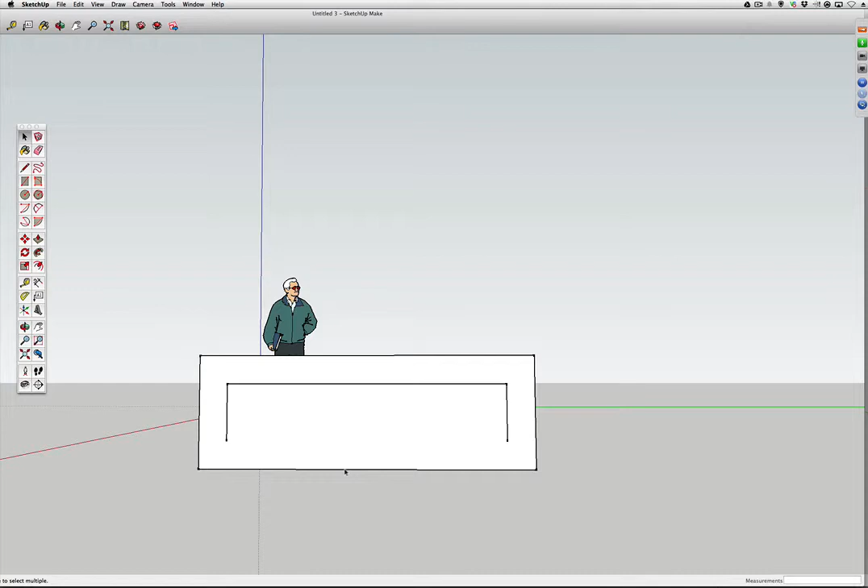I can also do, let me do this. Get that whole face there and then hit delete. And actually I just messed that up. Hang on, go back to that. Be that way.

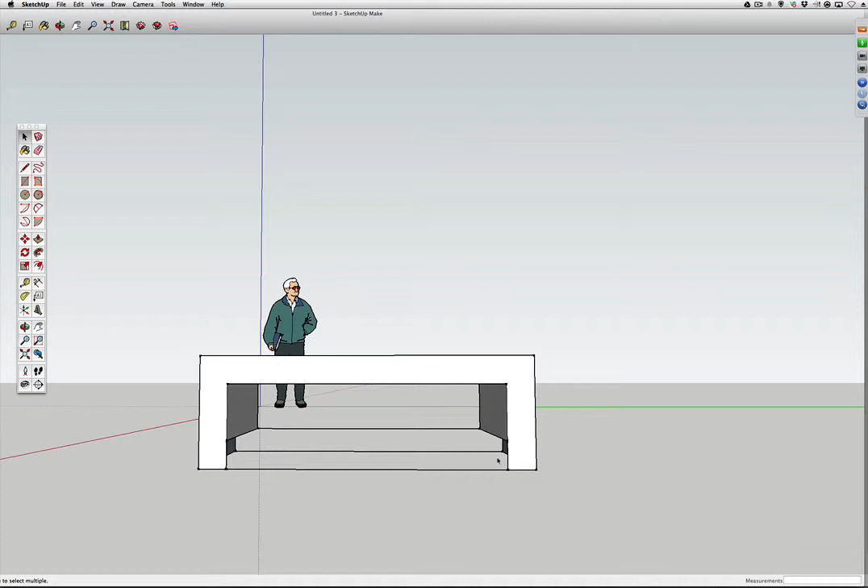So I took another opening out of the bottom of that. So that's another way you can do it. Here's another way to do it. I'll show you another way. So you've got that. Let's get this line over here. Shoot, let's do edit, redo. All right, we've got my lines drawn there. Let's do this.

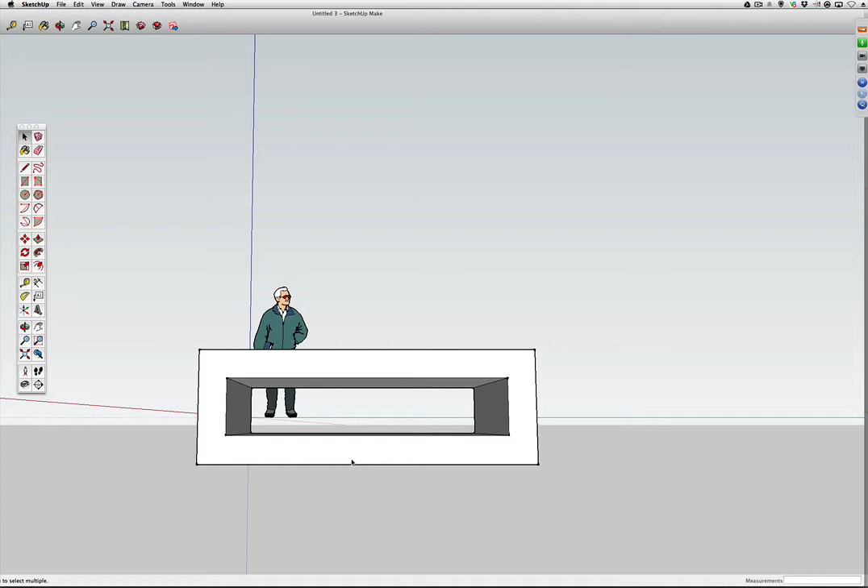Let me orbit this around so you can see that you got his legs all around. See how he's right there? Oh, I know part of the problem is, see how we're sunk below there? That doesn't help us. Okay, so then I'm going to click on this line, click on this line, and this line too. All right, so we have those. And I just got rid of them. I don't want to do that. All right, then I'll just delete it this way.

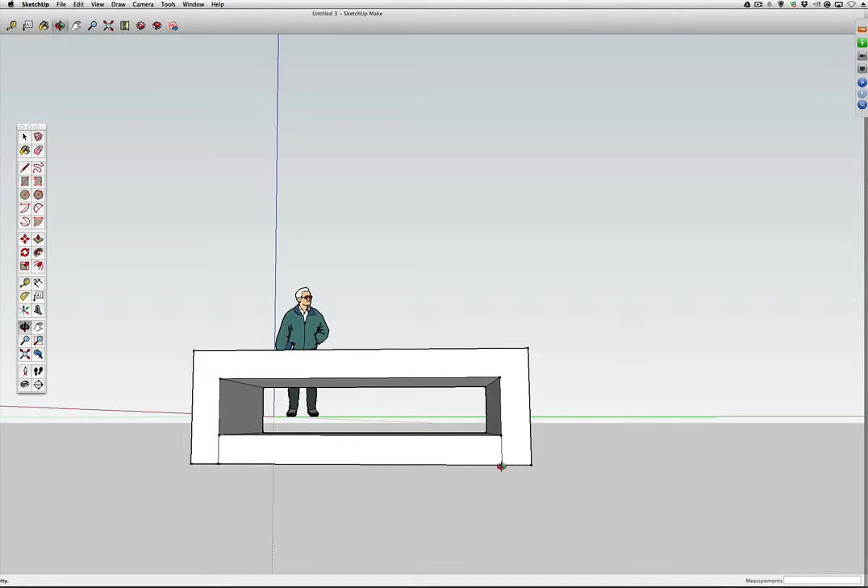And here. Now that's funky. I'm not expecting that. So let me see what I've done wrong here. This piece here, I was kind of counting on it deleting out. So what we'll do is we'll adapt. I'm going to click on this red line. I'm going to do another offset. I'm going to hit push.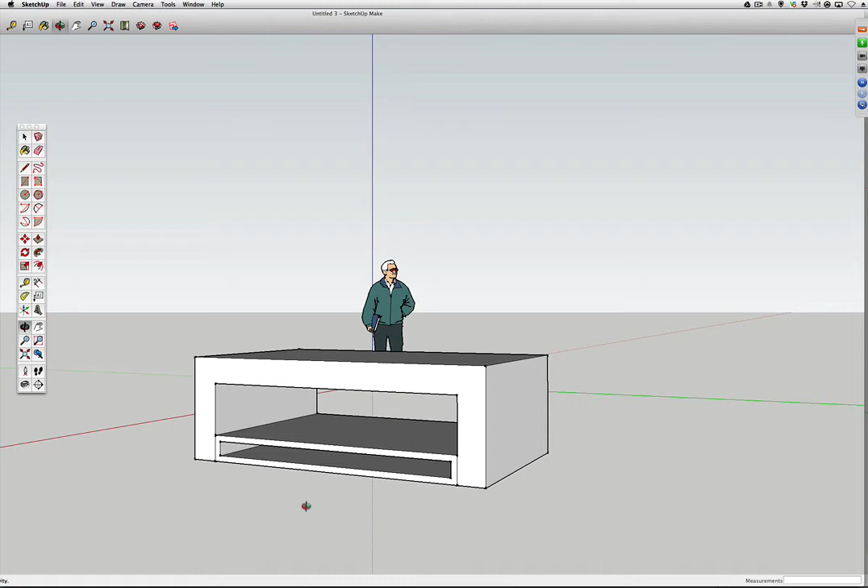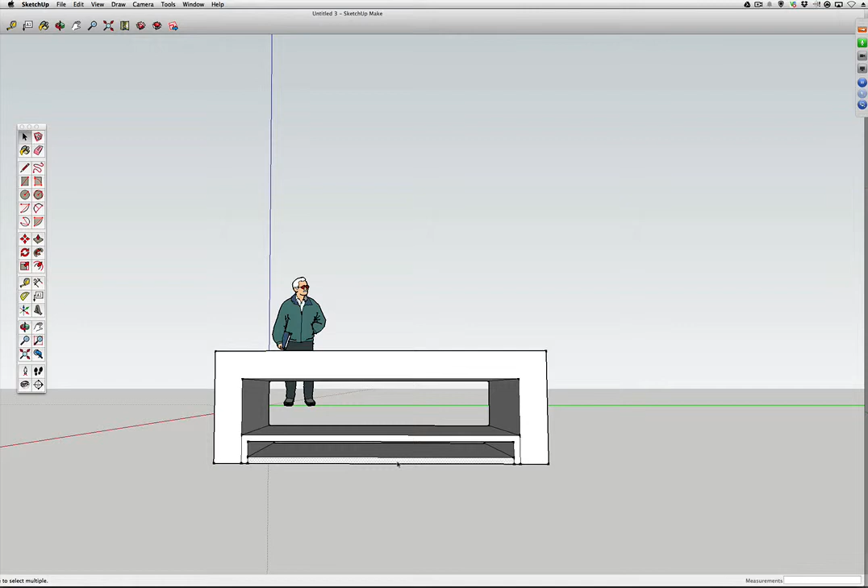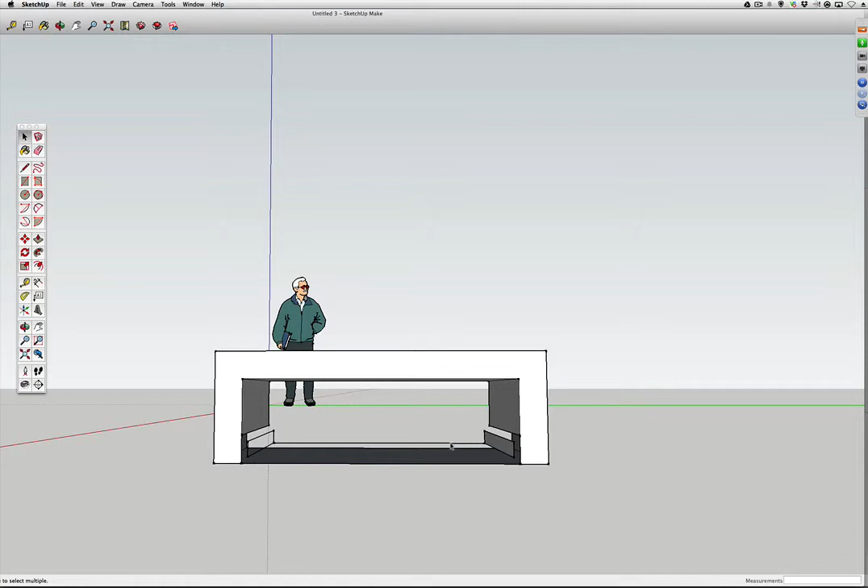On face, it's gone now. Okay. So I can start getting rid of things like that. And then I can do, let's try this again, line, hopefully it'll. Slowly getting rid of all the edges on there. So I deleted them all out of the way that way. That's kind of a slow way to do that, but I've done something funky here.

Like this should not have cut off the back. That's a start of a table. And if you just clean it up, you can ultimately still get to your table. Okay, so there's a table off of here. All right.

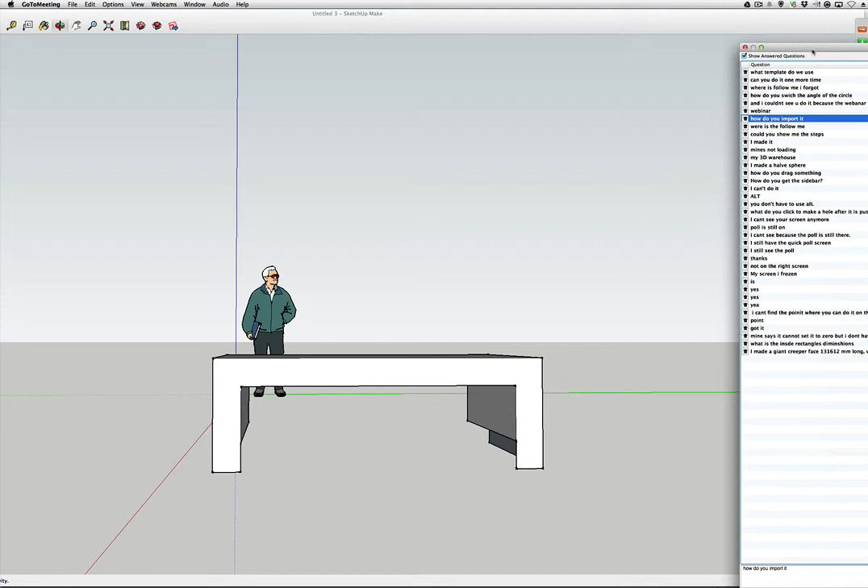Someone made a huge creeper face. That's awesome. Mine says it cannot set it to 0, but I don't have dimension set to 0. Got it. I'm not sure why it's saying it's set to 0 either.

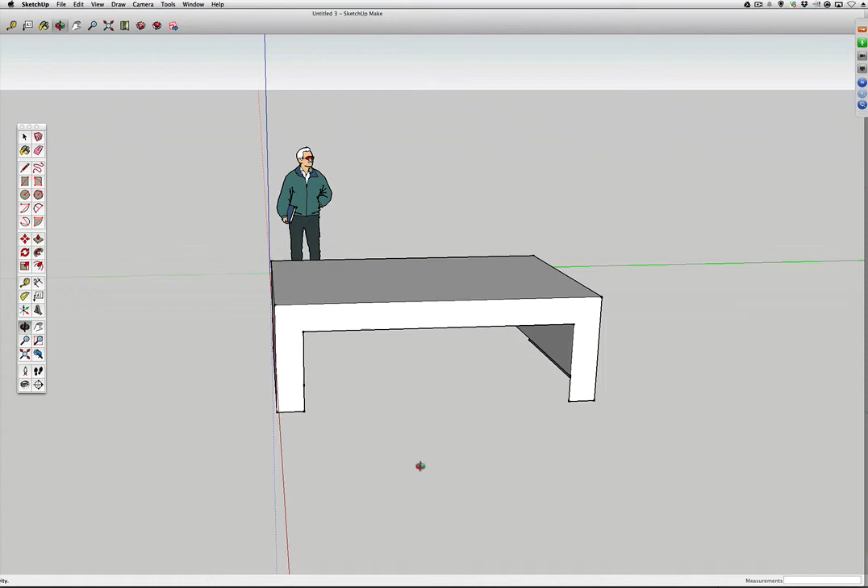Okay. So let's go through. I'll show everybody again one more time how to do this. Let me double click on this whole thing. Hang on. Spacebar, double click, delete the whole thing. It's gone. Let's try another one. Rectangle. This time we're just going to pull it, guys. We're not even going to get that involved with this. A narrow table.

Then we're going to do the offset. That's this little device right here. Click on that. Find an edge. You got to find an edge. Now that's an edge off the top. So that's what that's doing. So you can do one of these like raised. And what you can do here is, let me just show you. It's kind of a cool thing.

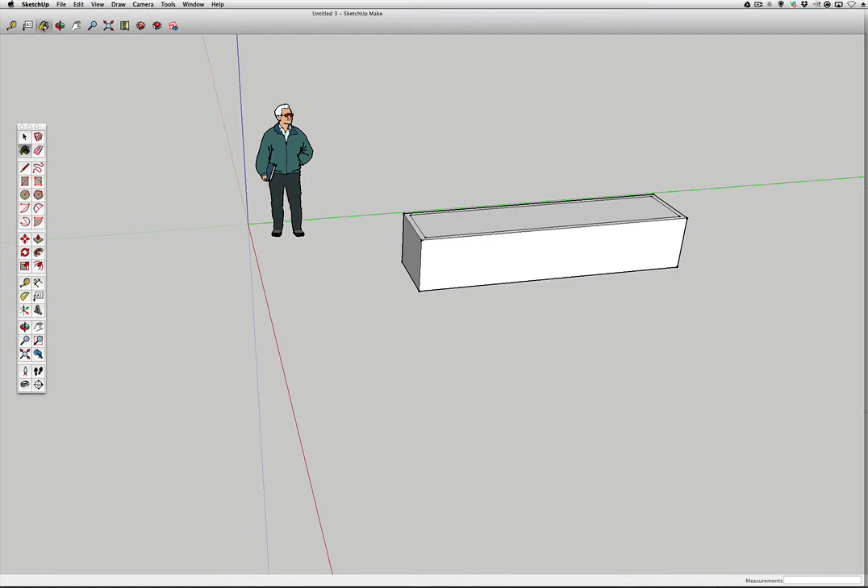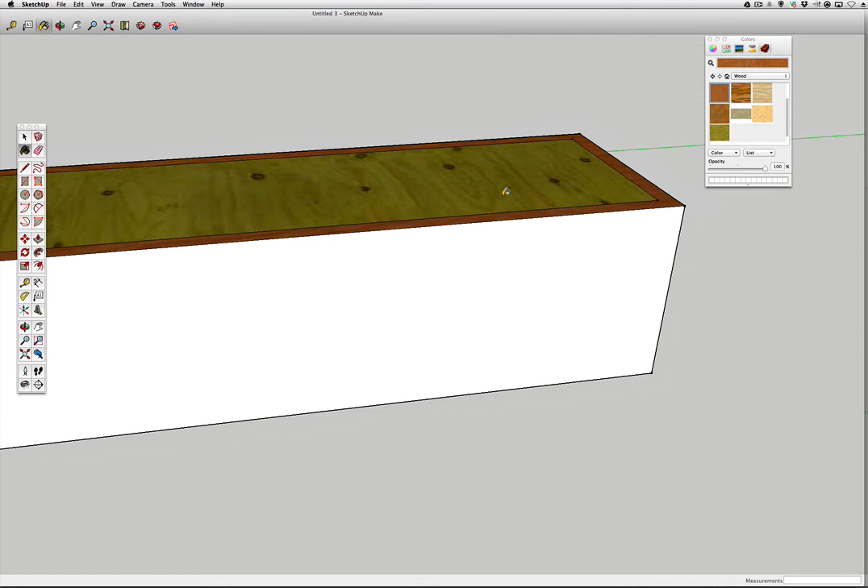Where's my colors and materials? Come on. Right there. Let me bring my colors and materials. Translucence. Let's try wood. And so you could do something here where you do green on the outside of this. Green there, and then zoom in on this. Get something going there. All right. And then what we can do is start making our, let's try this again.

Offset. Okay. And then look, I made that offset. That was this indication right there. Hitting P for pushing. I'm going to push it out. Oh, come on. Let me do this. I'm on face. It says I did it, but I don't feel like it did it. I guess it did. I feel better about his leg moving with it.

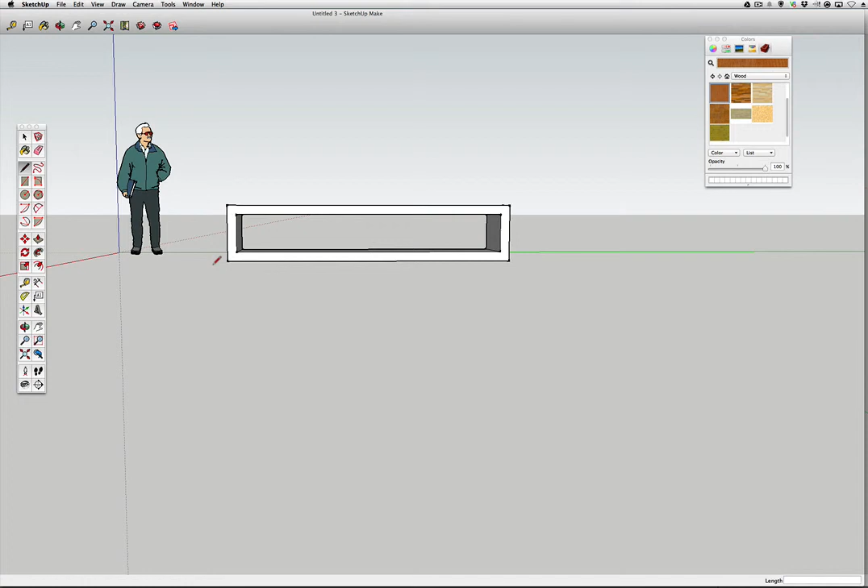And then hit the line and point and point. An edge. An edge. No, we don't want to do that.

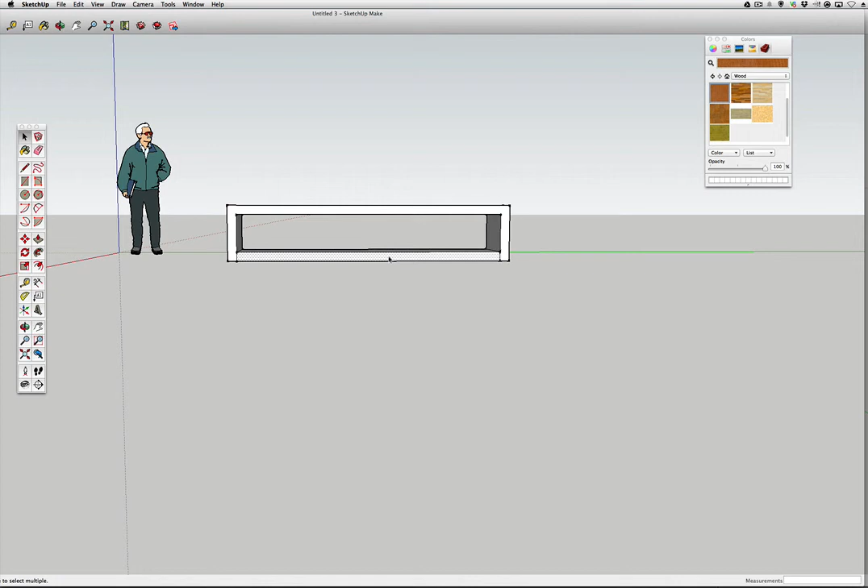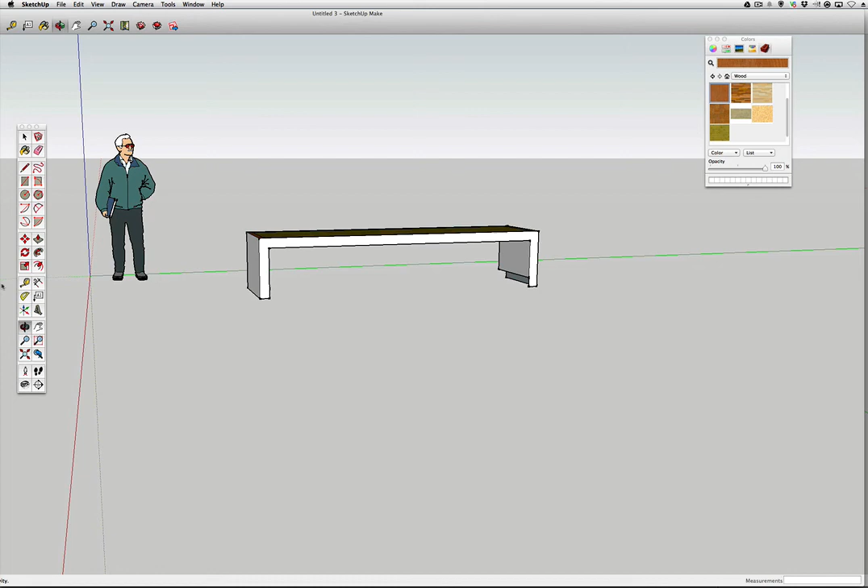And there's my table. Not as well as I really would like that to be. I don't like the one side's popping off. I'm not doing something quite right there. I'll check what I'm blowing. All right, but then you could put, you know, there you go. Here's his table. All right. We got a nice green table that matches his body.

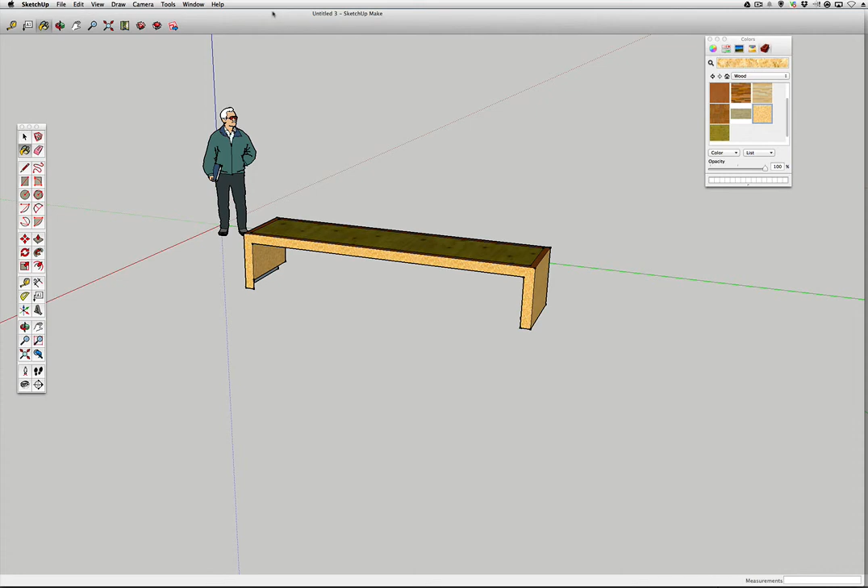All right, let me show you what we're going to try to do next week here, or Wednesday. Okay? And that was the table right there. And let me go to lesson 2. Go into components. Let me show you the table. Measured offset, hit the Move Tool.

I guess what I wasn't doing is I needed to go ahead and delete the bottom one first. I had it offset there. I need to delete that off. You can see I got rid of that line and then pushed or pulled the rest of it off. So that was a step I was messing up on. I was trying to push the whole thing back. I have to get rid of this line, push it back, and do it there. All right?

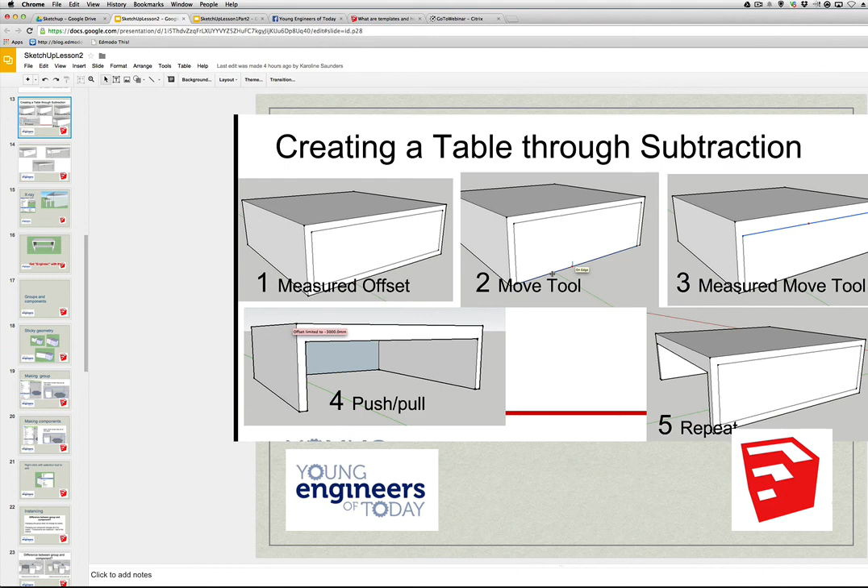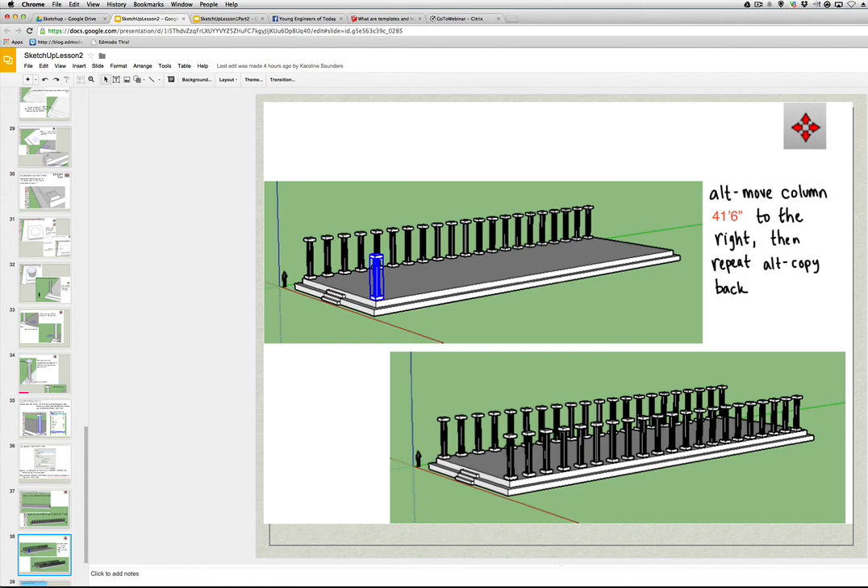Though honestly, boy, I'll tell you what, we'll try that again. The next thing I wanted to get to, so that was trying to get to that point here, is we're going to make this. Now, you're seeing all these parts, you're going to make columns. You're basically going to make your own temple. Okay, folks? That's what we're shooting for.